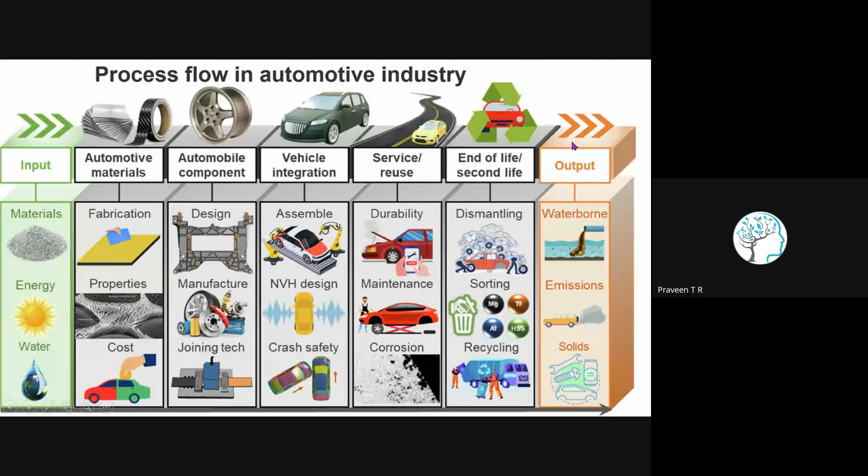So this is what generally happens, but in this manufacturing industry, I'll concentrate in the present session on energy. Energy is my main focus because I'm going to talk about pollution and carbon capturing. So whatever manufacturing industry we plan, we need energy - that is what we are going to talk about right now.

Another example is in the construction industry. In construction industry, we need aggregates, we need red bricks, we need sand, we need cement. Wherever you consider here, these raw materials are prepared by using energy, right?

Aggregate - right now we are using modern machineries which run by electricity or fossil fuels. We have to crush the stone to get the aggregates. So again here we are using energy in terms of mechanical energy from electricity or fossil fuels.

For sand, again we need to transport this sand from one place to another place, so we need energy here. Cement is one of the biggest energy consumption sectors. This is one of the cement processing plants, how it runs - I'm showing this because it's one of the biggest energy consumption sectors.

Again, if I want to manufacture bricks, I need to bring a lot of raw materials, then I have to cook it - cook the bricks to make them stronger. Or in engineering terms, we have to do autoclaving. This is what the civil industry requires, normal civil industry.

So when it comes to the preparation of cement, we need raw material coming from the truck. We are going to process it through crusher, secondary crusher, then we are going to proportion it - add the different parts. Grinding and milling, we are going to reduce the size of this, then put it in the hopper, preheater, kiln, and autoclave again. Lot of process in civil industry.

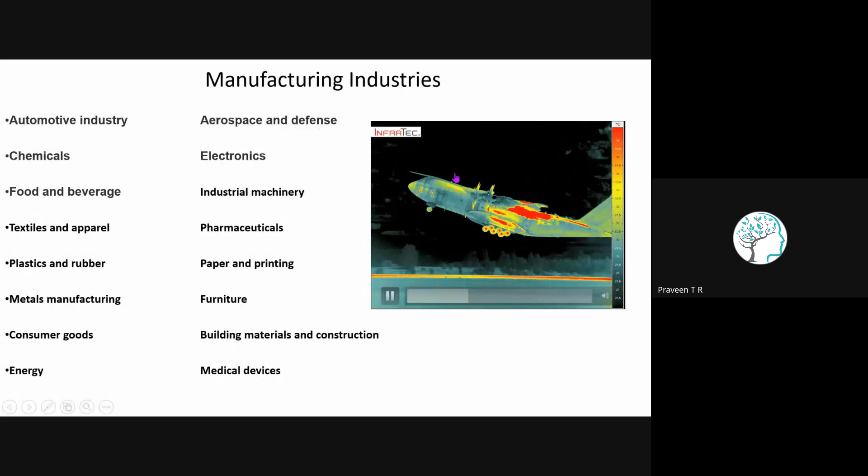Every industry needs some sort of energy. So where are we getting this energy from? That is very important in our discussions.

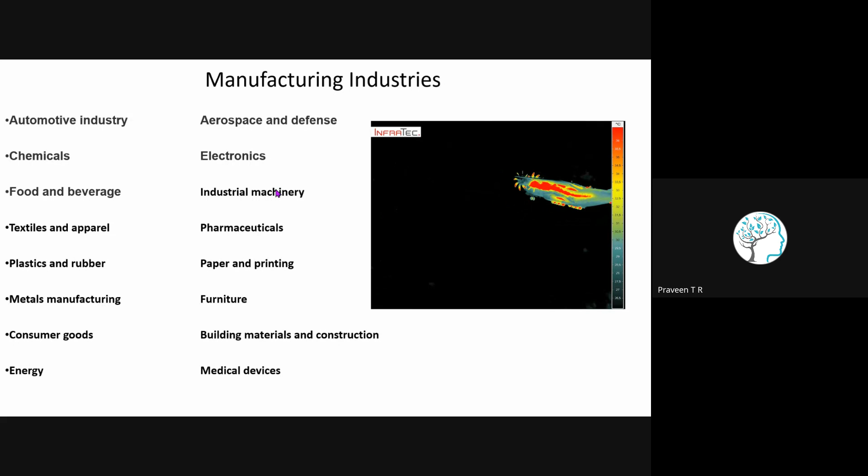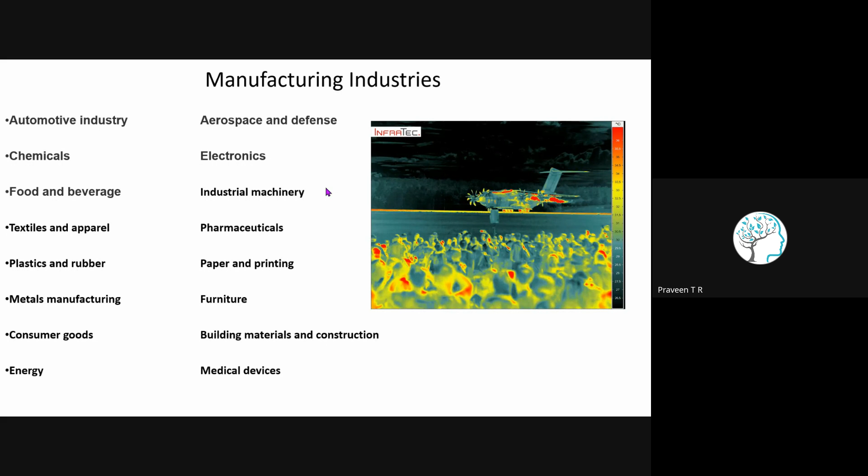So in the previous slides, I tried to introduce the industries, manufacturing industries. In the next slide, we will take up a very important challenge for human life - industrial pollutions.

As I told, we need energy for manufacturing or processing. Where are we going to get the energy? Energy is obtained from a lot of sources, which I'm going to discuss in the upcoming slides.

So what are the different pollutions? Right now we are concentrating on air pollution, which is very critical. You can see a lot of people suffering from respiration problems. If you go to North India, because the temperature is dropping, the pollution will increase.

At the same time, people will try to fire their agricultural land, which will emit a lot of smog. This will increase the particulate matter in the air, which creates a lot of difficulty with respiration problems. Lakhs of people will die because of this air pollution.

So the second one is thermal pollution. What happens if you go to a nuclear power plant or steam power plant? They will boil the water to produce steam, then feed it to the turbine to convert heat energy into mechanical energy.

Once that is done, they will take out the water. Some part of the heat from the exhaust water, they will reuse it. Some other part of the water, with its temperature, will go into the environment.

So what happens when you spread hot water into the environment? That is also very critical. Water pollution - we use a lot of water in industries, and the output of this used water will be thrown again to environmental sources.

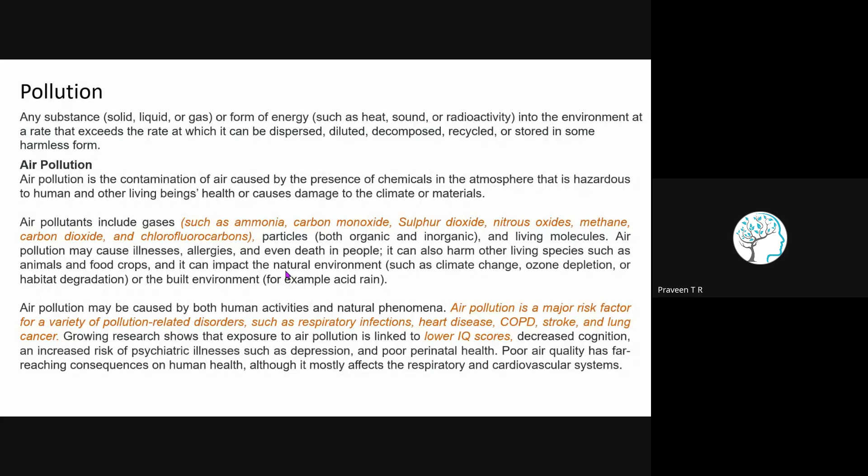Let's talk about some more interesting things regarding our environment, how we survive and how we think. This is how metabolism occurs. Whatever we eat gets converted - food is digested in our stomach, and once digested, it passes to the intestines, which extract the nutrients, and then it gets pumped to the remaining parts of the body.

The basic criteria of food is that it has to generate heat, to keep our body warm. Once the body is warm, the other parts of the body will start working properly and more comfortably. So once it's more comfortable, everything will work properly. Our brain is very important for everything - it controls everything. That's the basic control system.

This is how our industry also evolved - based on the brain's working methodology, we work with automation, AI technology, neural networks. We're simulating everything from nature basically. So what happens is the brain sends proper signals to the heart, to the lungs, to the stomach, to every part of the body. So how exactly does the brain work?

The brain gets supplied with oxygen - you breathe oxygen here, and when you breathe good oxygen, you'll have very good oxygen-rich blood. This is the pump - this blood comes from the heart to the lungs, and from the lungs it goes to the brain again. When you have very good oxygen, you'll have better thinking patterns. That's the reason.

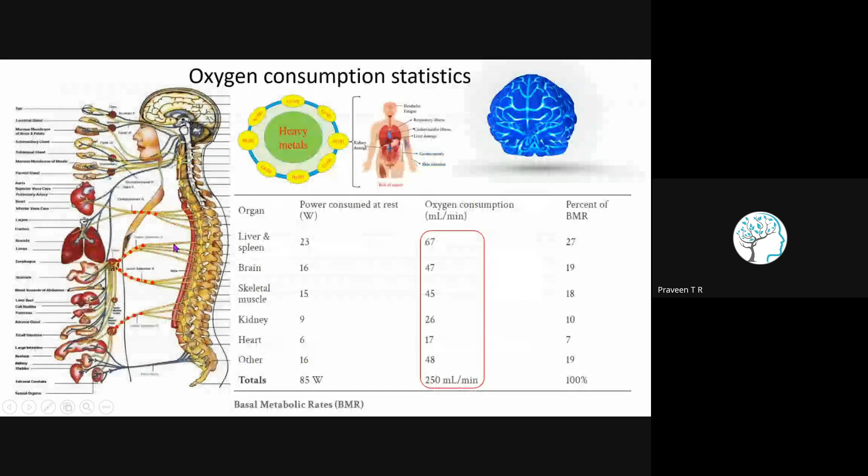Then your basic function of organs will get affected. If you eat something bad, your stomach gets upset. You may get a headache, or if you eat something with more cholesterol, you will get blockages. Lot of things. Basically whatever we eat is reflected in our health system. So this is what happens, hence proper food and proper oxygen are very, very important in our life.

So this is basically what I discussed till now, how we are going to survive in the present scenario with our human environment. How is our human environment created? The next question is how our human environment is created and how it is maintained.

So basically this is our solar system, this is our sun, our earth and moon. It will be rotating in an inclined position, rotating at an inclined rotation and spinning on its own axis. So there are two angular movements.

So as it is spinning, the area exposed to the sun keeps on changing with the spinning axis. That is what gives us daylight and night. When it is exposed to the sun we have daytime, when it is facing away from the sun, it will be having a night mode.

So what happens when it is exposed to the sun? 43% of the total radiant energy emitted from the sun is in the visible part. For example, out of 100% of the solar energy from the sun, we receive some energy in terms of electromagnetic radiation. This is the wave we receive in the form of energy. We receive X-rays, UV rays, visible rays, infrared rays, microwaves, radio waves, and some other profiles of wave nature. So this is what we receive from the sun.

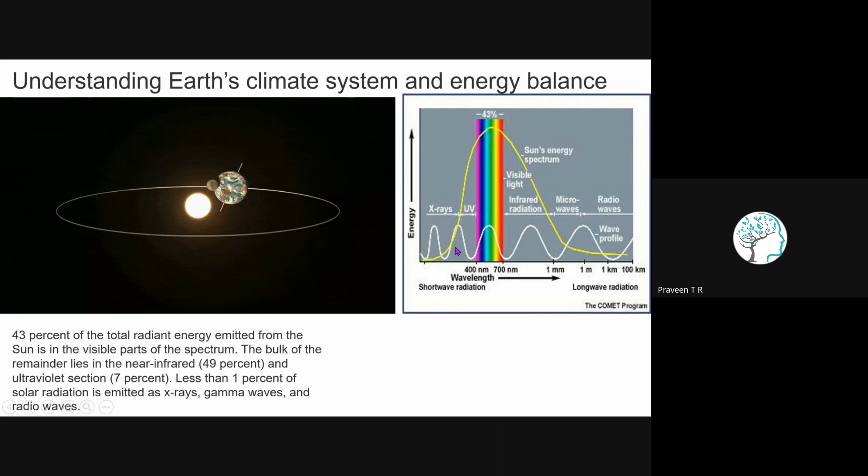So basically what we have understood is the major source of energy from the sun is in terms of visible light and heat energy. This is what we are able to get from the sun.

So, energy budget. Earth's energy budget. For example, imagine you have a bowl in your home, and you are putting in every day 1 liter of milk, and you are taking out every day 1 liter of milk. So your balance of milk each day will be zero. If you buy 2 liters of milk but consume only 1 liter, the other liter will get wasted, right? It is not balanced, so you will accumulate a lot of waste.

So similarly, what happens with our environment? Earth's balance means, for example, incoming solar energy. If you consider 100% of solar energy that we are receiving, out of that, 51% will be received by land and oceans. Whatever land and ocean, the Earth's surface will receive, 51% will be absorbed. This creates a lot of biologically active systems and makes the Earth's surface warmer. That's the way we are able to live on the Earth's surface. So this 51% is very, very crucial and important.

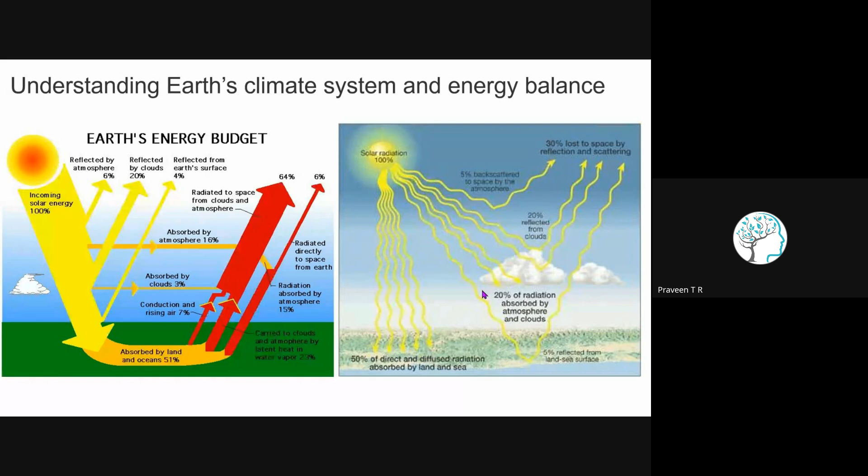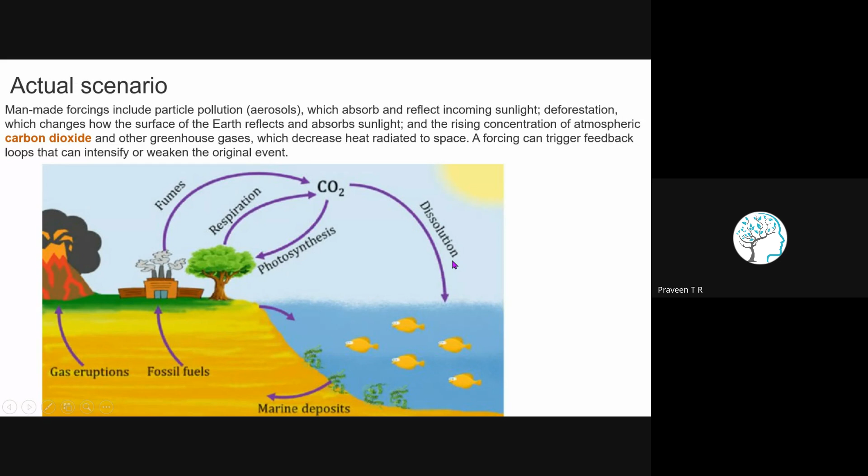Similarly, in the seabed also, for example marine life like fish and other water animals will be emitting carbon dioxide, and this will be consumed by the marine plantations. So this is how the actual photosynthesis works. Basically, we will be emitting more CO2 because of our human activities.

So what exactly happens in combustion? In the combustion reaction, we need hydrocarbons, like sugar, fat, something like that. This hydrocarbon always requires oxygen to get our required heat, so oxygen is a must. When you use oxygen with hydrocarbons, the byproduct you always get is carbon dioxide and water. So however much energy you want, in that same way, carbon dioxide will increase - more energy, more carbon dioxide.

Less energy, less carbon dioxide—it's directly proportional, basically. So in this picture, I'm trying to show fossil fuel consumption in 2023. There are different fossil fuels like coal, natural gas, and oil. We can see how much China is consuming.

So why are these countries important? If you see China, the population is more, the manufacturing industries are more, hence the consumption is more. If you come to the US also, they have a lot of manufacturing industry—even though the population is less, consumption is more.

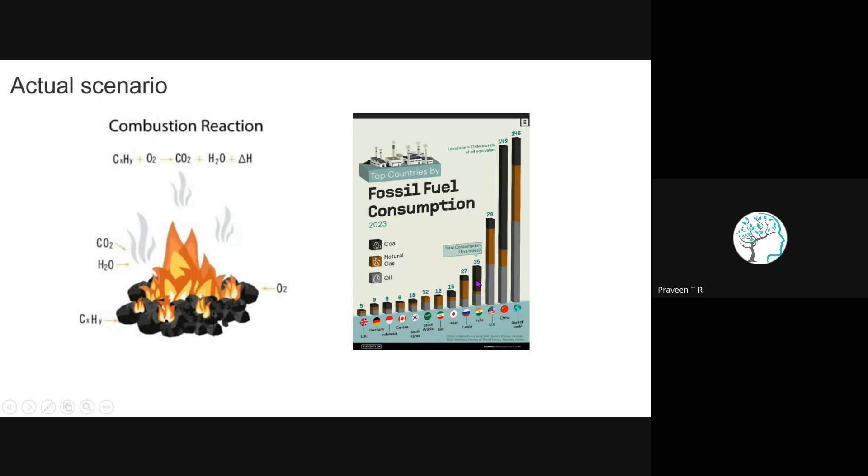Just think how much fuel you consume—such a quantity of oxygen is also required for your energy generation, and so much carbon dioxide is emitted. Hence energy production is completely directly proportional to carbon dioxide emissions.

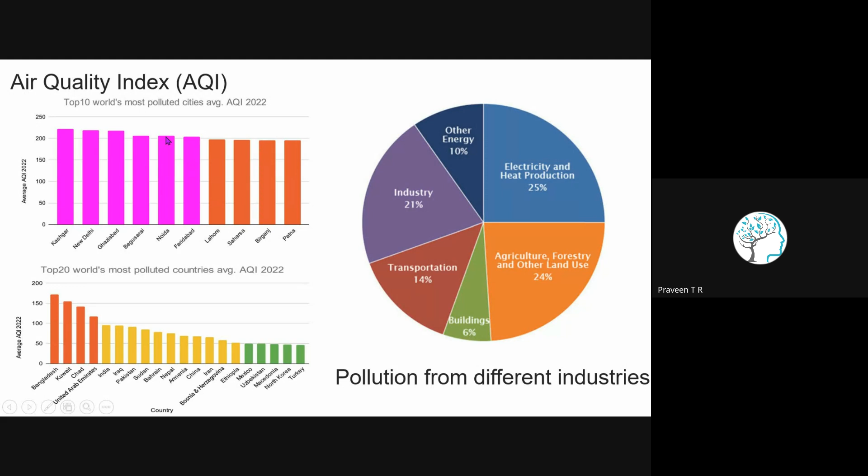Red is unhealthy. Some members of the general public may experience health effects, and sensitive groups may experience more serious health effects. So if you look here, Delhi is classed at 200, Ghaziabad is classed at 200, Noida is classed at 200, Patna is near this one, Faridabad is classed at 200. That means they are all in this red, already unhealthy conditions. That's the reason people are more repeatedly going to the hospital for respiratory issues.

Purple is very unhealthy, more than 201 to 300. Health alert: the risk of health effects is increased for everyone, even healthy people and younger age groups will get affected. Maroon, there's not much to talk about this one - it's hazardous. We cannot take in any air, or we cannot breathe at all in these conditions.

So air quality is very important. This shows air quality directly shows life quality. We can convert it in these terms - air quality basically translates into life quality. So think about that, that's the reason at least go to some places where you will have good air quality index, breathe for some time, get release of your stress and all, come back and work. So this is how lifestyle is required right now.

Main air pollution sources, as I discussed in the previous slide, similar to that: waste treatment - when you do waste treatment, a lot of chemicals will be released like methane and other gases into the environment. Farming - when you burn farming waste, a lot of smoke gets released. Transport, again it's a combustion process, you get a lot of emissions. Works and mining - basically if you want to get something, you need to burn energy, and when you're burning energy, you get emissions. Livestock - when we breathe, we receive oxygen and emit carbon dioxide, similarly with livestock.

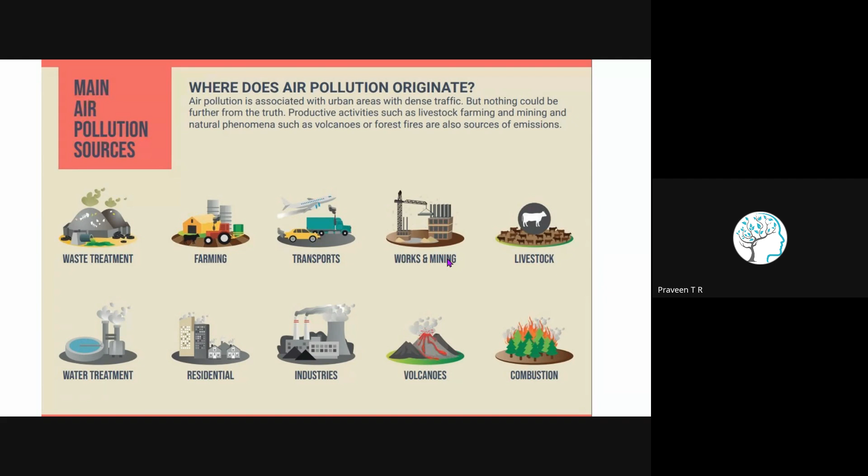So water treatment, residential, industrial, volcanoes, combustion - everything is very similar. As mentioned earlier, every process, natural or man-made, produces air pollution. But natural processes are not so easy to control, while man-made processes we can at least try to control. That is the main intention.

So, types of industrial emissions. Industrial emissions come from different sources and have important consequences for health and environment, which underlines the importance of controlling and reducing industrial emissions.

The main industrial emission is carbon dioxide, the main greenhouse gas emitted from fossil fuel combustion. How much energy is required determines how much carbon dioxide will be emitted to the surroundings, in power plants and manufacturing, contributing to global warming and climate change. Global warming means the temperature of the globe is increasing.

It's alarming already. Methane gas is emitted during the production and transport of coal, oil, and natural gas, as well as by certain industrial processes, and is more potent than CO2 in terms of impact on global warming. I will explain why CO2 and CH4 are more potent in the upcoming slide.

Nitrogen oxides are gases resulting from high temperature reactions in industrial processes and vehicle combustion. They can cause respiratory problems and contribute to the formation of smog and acid rain. Since air is a combination of nitrogen and oxygen, when you supply air for combustion, you're also supplying nitrogen. When nitrogen is exposed to high temperature with oxygen, there will be production of nitrogen oxides, causing smog and acid rain.

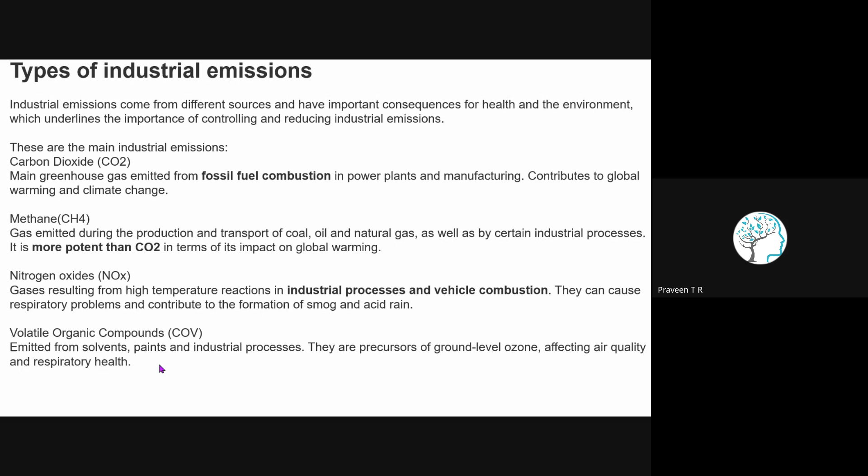Some other emissions are particulate matters, meaning small particles from combustion on stationary and mobile sources. They can penetrate deep into the lungs and cause cardiovascular and respiratory problems. So we have to reduce emissions as much as possible.

Hydrogen sulfide is a rotten egg odor gas released by industrial processes such as oil refining. At high concentration, it can be toxic and affect human health. One of the basic characteristics of hydrogen sulfide is its very bad smell, like a rotten egg odor.

When people have gastritis, they will start to have that smell when they fart. It's practical science - when they fart, they will have a very bad smell, which is the smell of hydrogen sulfide. That indicates the sulfide content is more in the body and your digestion system will be having a problem.

Asbestos is mineral fibers used in construction and manufacturing. Inhalation of asbestos fibers can cause serious lung diseases, including cancer. So in this category, it's very important.

Recently, I came across one of the cases locally - people working in the fiber industry, some small fibers went inside their lungs. In the beginning, it doesn't create any problem, but after a long time, after long years, the patient is getting cancer symptoms. He's undergoing cancer treatment right now. That is basically the mineral fiber which went inside the lung.

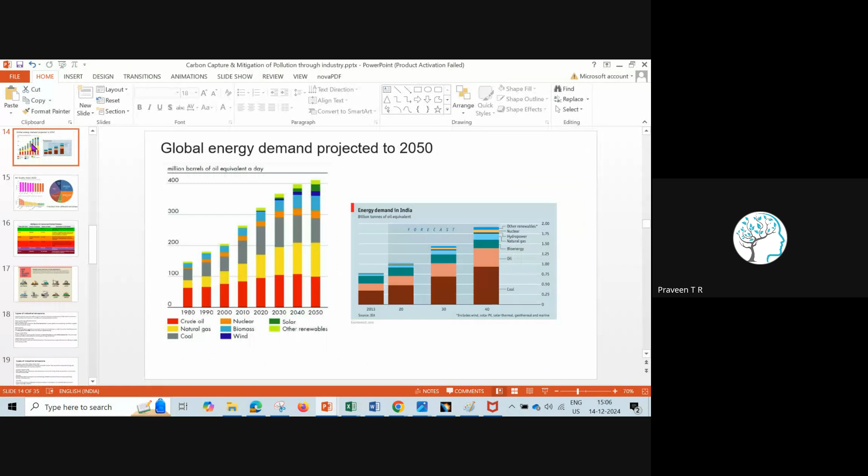This indicates that however much fossil fuel we burn, that much quantity of emissions we are going to get.

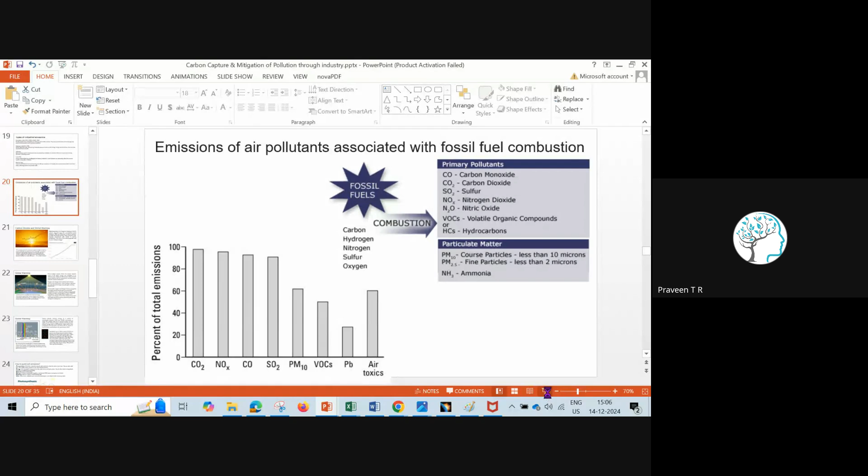So now onwards I will concentrate only on CO2, because CO2 is one of the major contributors to global warming. We have to look at this because the temperature of the earth is increasing. Let's try to understand what exactly carbon dioxide and global warming are doing.

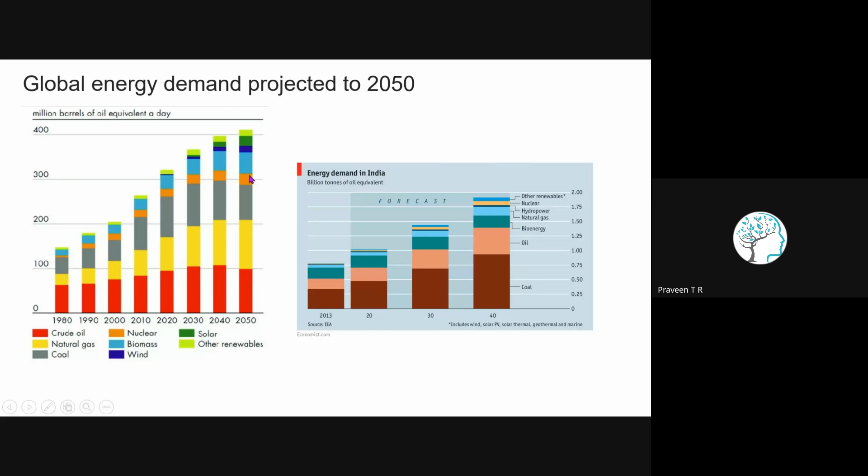In 2024, for example, you can take it here - we are burning this much of millions of barrels of oil, this much of billions of tonnes of oil equivalent. So that's the reason we are getting 420 ppm. But as projected for 2050, the energy sector will be increasing - we are going to combust more and more, meaning obviously the carbon emissions will rise. But as per the evidence, we have to come back to 350 parts per million.

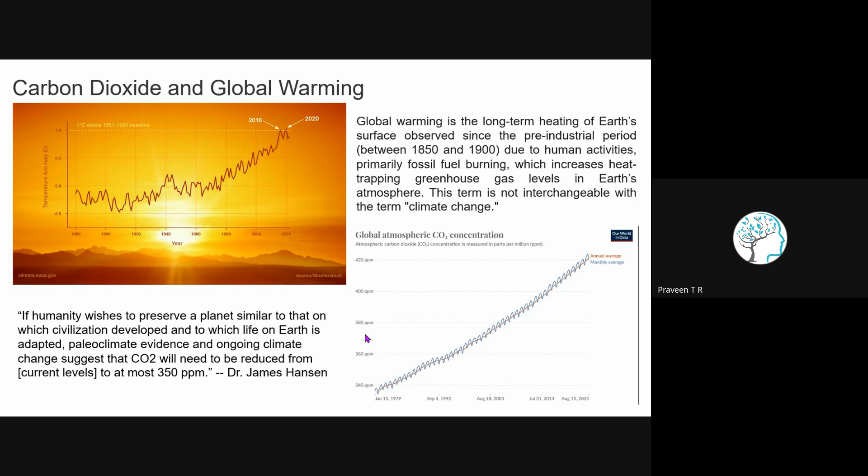Why do we have to decrease carbon dioxide? Why not other gases? We are going to address that in the upcoming slides.

Global warming - we will try to understand what exactly global warming is. When sunlight reaches Earth, the Earth's surface absorbs some of the light energy and radiates it as infrared waves, which we feel as heat. These infrared waves travel up into the atmosphere and will escape back into space if unimpeded.

So what happens is the energy from the source comes to the Earth's surface, whether in terms of light or heat. Even if in terms of heat, it will get converted into infrared waves on the surface, and the heat waves will go back to space if no disturbance exists. So what happens if disturbances exist?

What are the particles in the atmospheric air? We have oxygen, nitrogen, and right now we have emission gases also like carbon dioxide, carbon monoxide, nitrous oxides. So different emission sources we have, along with oxygen and nitrogen, in the atmospheric air. Oxygen and nitrogen don't interfere with infrared waves in the atmosphere because molecules are picky about the range of wavelengths that they interact with.

See, carefully understand here - in this atmosphere we will be having water molecules in terms of vapor, carbon dioxide, methane gas, oxygen molecules, and nitrogen molecules. So in this atmosphere, nitrogen and oxygen molecules do not affect the heat going back to space. The nitrogen and oxygen does not affect what is going back to the space.

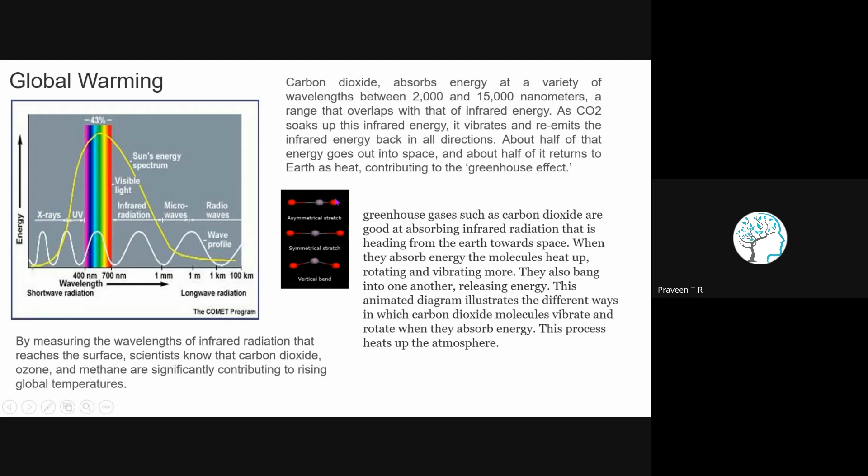Once it is absorbed, it will vibrate. There are different types of vibration modes: asymmetrical stretch, symmetrical stretch, and bending mode. Whenever it vibrates, it emits the energy again in all directions. Some part of the energy goes back to space, and some part reflects back to the earth.

So this is what CO2, H2O, and methane do. Oxygen, O2, has a smaller molecule size, so it can easily allow this infrared wave to escape. Nitrogen is also smaller, so it escapes too. But carbon dioxide is longer, H2O or moisture is longer, and methane is a compound - these molecules will not allow the infrared rays to directly go to space. These molecules absorb the infrared waves and vibrate, with some part reflected back to space and some part reflected back to earth.

So this is the reason for the earth's atmosphere getting warmer. This is a very important logic. Any doubts? If you want to ask any questions from these slides, it's most welcome.

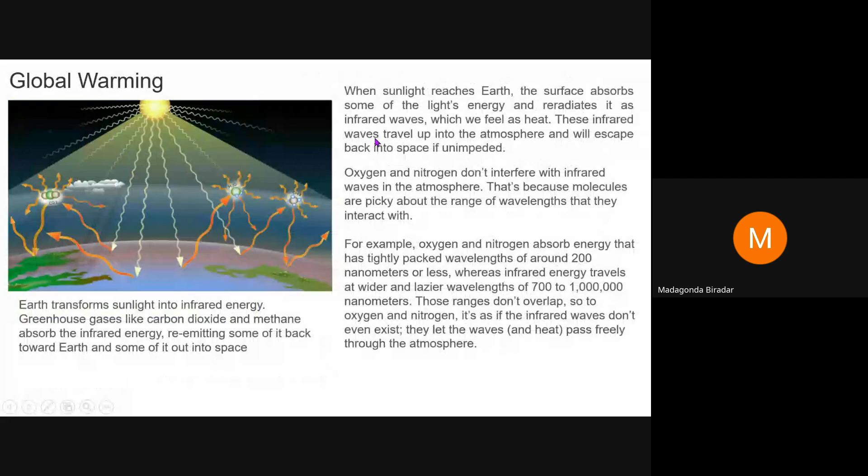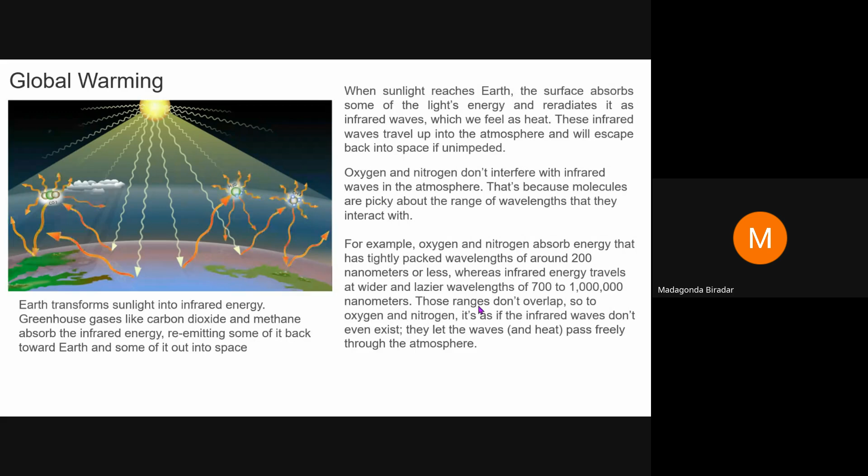So this is what Dr. Praveen, yes. Just sorry for the disturbance in between. We have time up to 3:30, sir, so you are really going in deep, sir. Okay, time, okay. With another, okay, I will try to. Okay, fine, thank you.

So this I covered. Now, how to avoid the CO2 emissions?

Transport - if you decrease transportation, decrease energy use for food, business, shopping - if you consume less energy, there is a probability of using less fossil fuels and a possibility of less CO2 emission. But we are not willing to do that because we want a more comfortable life, so we will burn more energy. That is our nature.

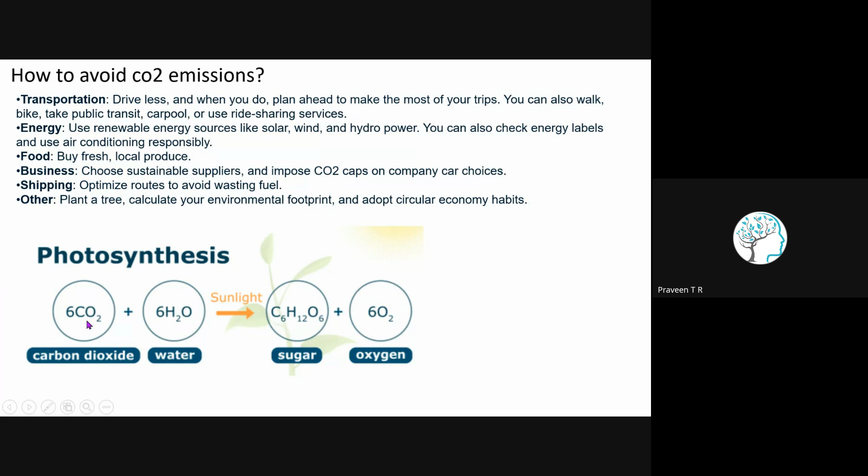Second thing is photosynthesis. As we know, photosynthesis requires carbon dioxide and H2O. When this reacts with sunlight, we get sugar, which is a carbohydrate, and oxygen again. But we are also working against this through deforestation, so the quantity of photosynthesis decreases. That is the reason CO2 is more and more in the environment.

So what is the other thing we can see? Carbon capture and storage. As we know, industries burn more and more fuel, and this is the source of getting carbon dioxide. As we know from human activities, why can't we capture the carbon dioxide at the origin itself and try to use it or store it in some other way? That is what carbon capture and storage will try to help us with - you can store it or you can use it also.

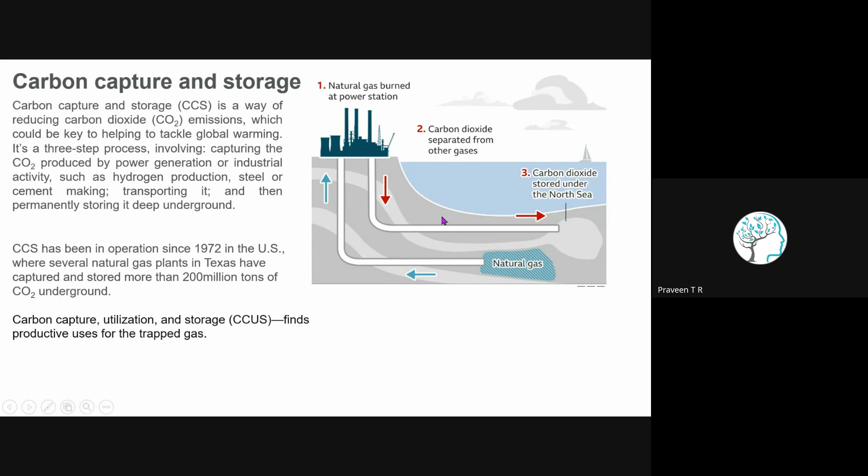Okay, so that is the two options we have. Carbon capture methods usually include absorption method, cryogenic method, membrane separation method, adsorption method, and chemical looping method. Maybe I will take absorption method and membrane separation method, so I will try to not spend much time on the remaining part.

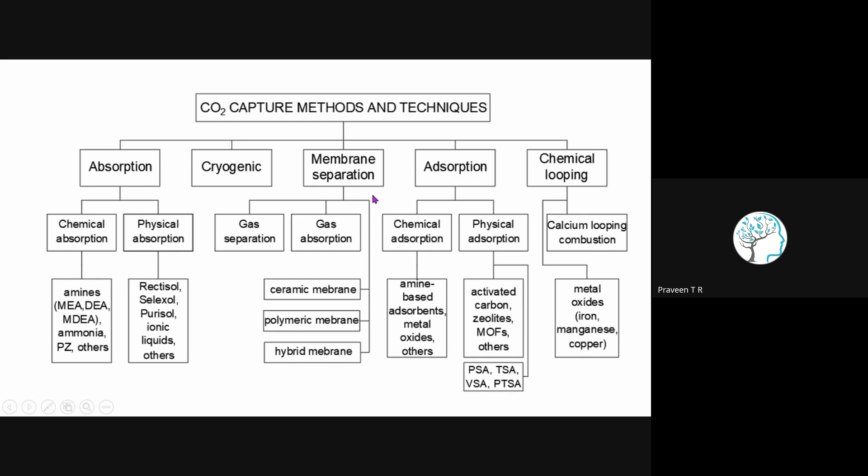Okay, pre-combustion method. As we know, combustion is required for energy sources. What are the combustion requirements? We need hydrocarbons and oxygen. So what happens here? We will be supplying fuel like coal, gas, and biomass, along with oxygen and water. Gasification happens here, and we supply the temperature. From the gasification, we'll be getting carbon monoxide and hydrogen.

When we pump this gasification product into the water gas shift (WGS), what happens? We will be pumping H2O and converting CO into CO2, while keeping H2 as it is. So carbon monoxide is converted to CO2, and we have hydrogen. CO2 and H2 separation will occur. We take the CO2 somewhere else, and H2 is pumped into the combustion chamber. We supply air and get pure combustion in terms of heat and electricity, with water as the byproduct.

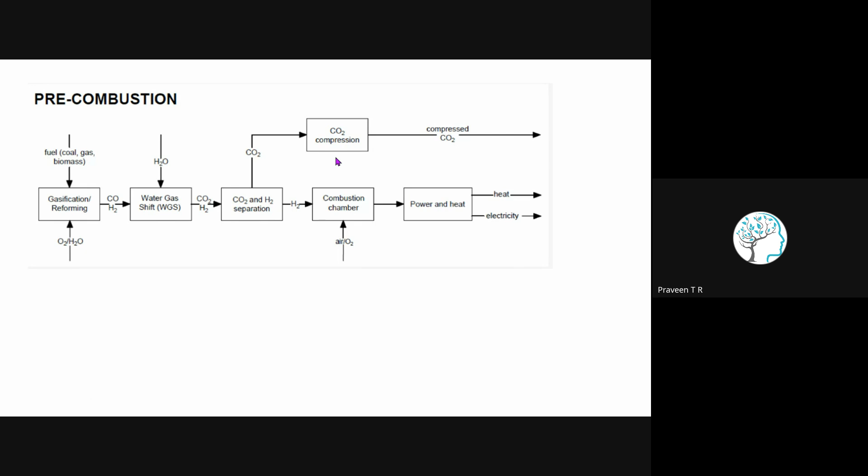So CO2 will be separated and compressed. When you compress it, what happens? It changes phase from vapor to liquid. When compressed, it is stored in some places. So this is the pre-combustion technique.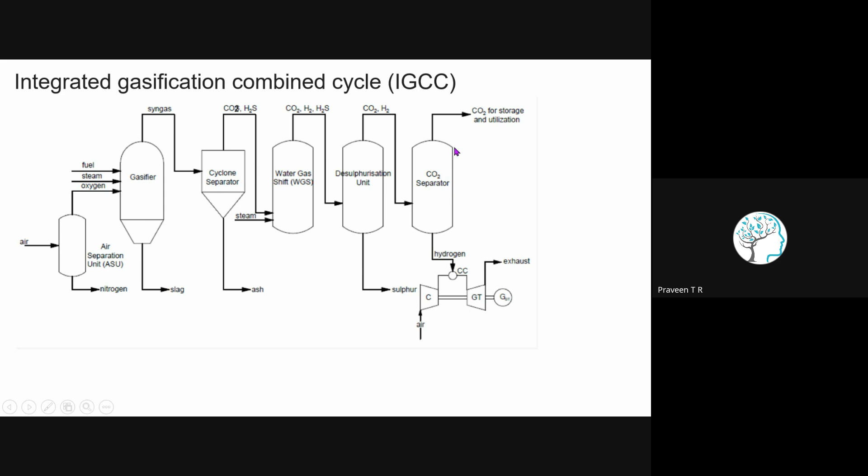We supply high temperature steam here, and again the water gas shift takes place. We get CO2, H2, and H2S gas. The desulfurization unit separates the sulfur parts. Again, CO2 and H2 come out after the sulfur separation and go to the CO2 separator. Hydrogen is supplied to the combustion chamber, and CO2 is again compressed and stored or utilized.

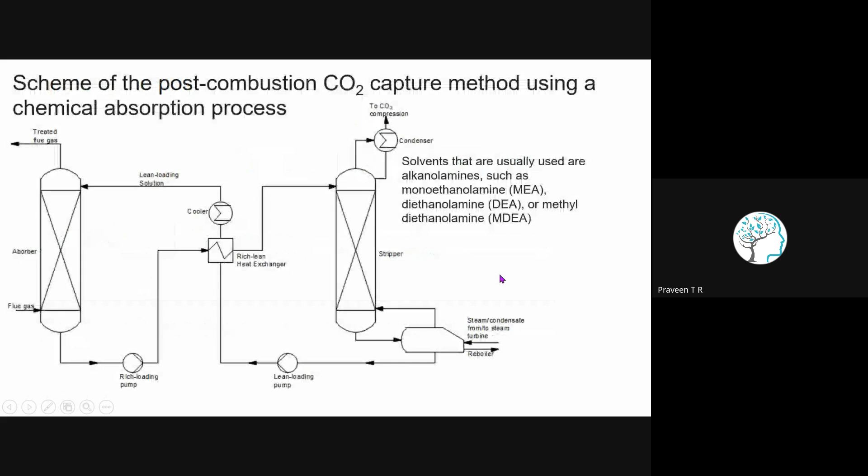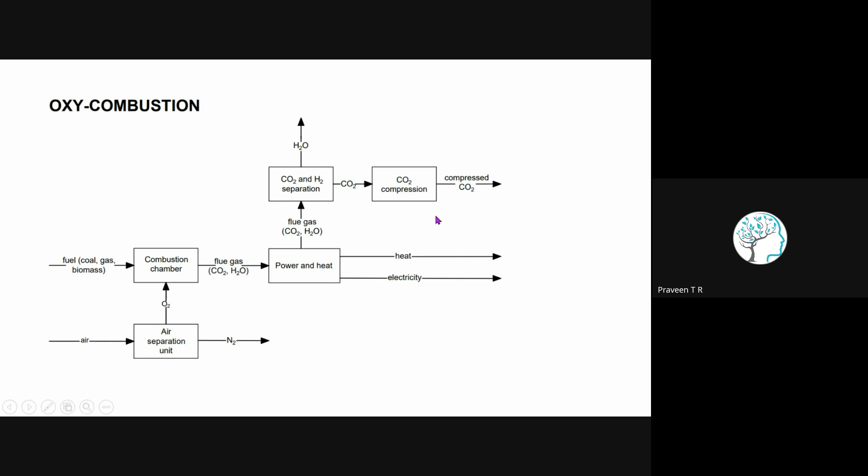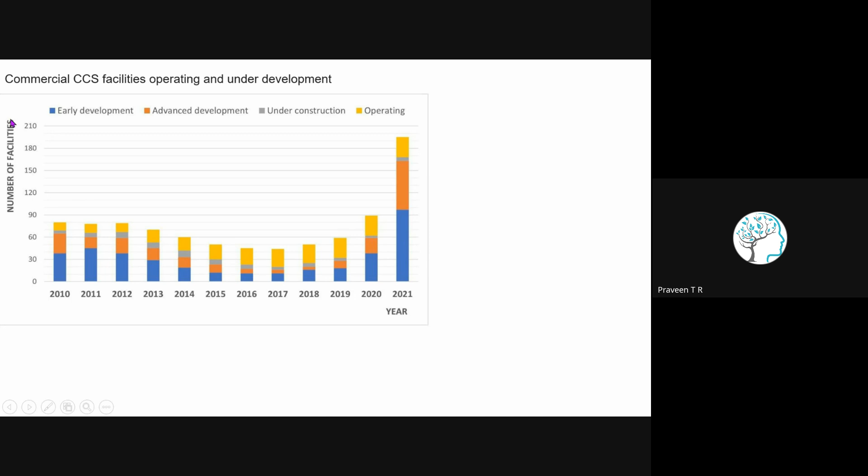Okay, so how many people are looking for CCS facilities? You can see the numbers increase. From 2020 to 2021, there is a very big increase in the number of facilities. But even though it's doubled, the quantity will still be very small compared to this one. Right now we are very famous in the US basically.

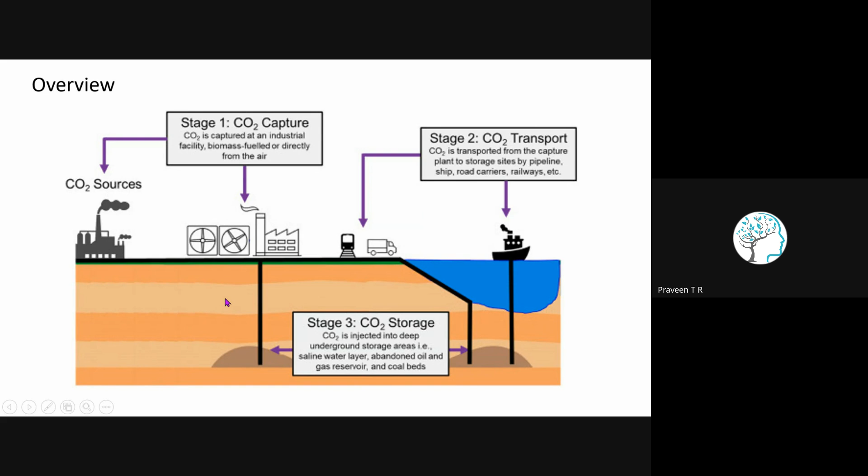So what are the drawbacks? Basically we have to spend a lot of money for the capturing. You need additional support, additional system, additional energy. These are the things you have to penalize to society to make it work. The second thing, whatever we capture and store, we have to make sure there will never be any vent holes or other damage, or it may create some problem with the earth's plates also. So this may be another issue with respect to the CCS technique.

So this is what I just want to convey. Any questions?

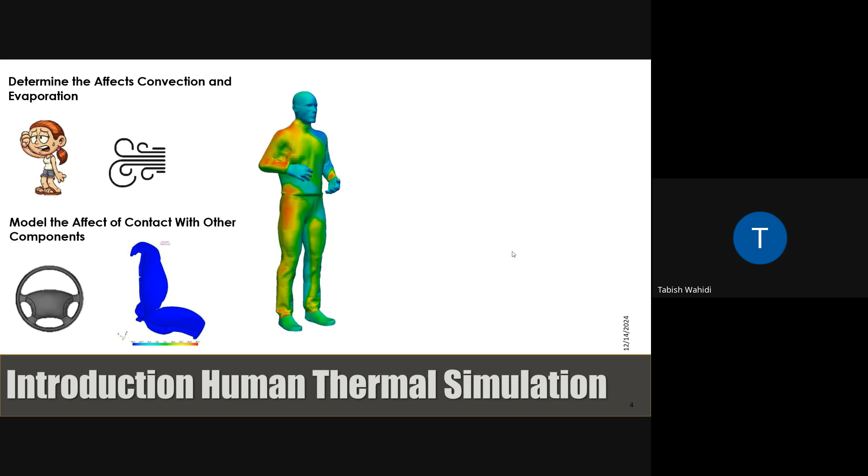Apart from that, it also matters what the environment condition is outside, whether it's a very cold place, a very hot place, or a normal environmental situation where the human is standing or performing some activities.

Based on this, we try to understand the human's local comfort, local sensation, local body temperature, and overall body temperature. All these factors will decide human comfort and sensation.

Apart from this, we have to consider a lot of things, like your body mass, your size, whether you are male or female, your body mass index, how fat you are, how tall you are, what type of clothing you are wearing, what type of body activities you are performing, how long you are doing some activity, whether sleeping, driving a car, or going to the gym, how rigorously you are doing gym, and for how long.

So every aspect comes into picture when trying to simulate the human and understand human behavior in terms of thermal simulation - whether the human is comfortable, feeling sensation, sweating, shivering, what is the blood flow rate, what is the overall body temperature, hypothalamus temperature. All this depends on these activities, on body size, and on activities.

Now let's take some situations. Consider a man sitting in a car, where there is solar loading coming onto the dashboard, heat getting radiated from these positions, and if your seat is not comfortable, it's also radiating heat to you.

Or you may consider a situation where an airplane is flying at very high altitude, at very high velocity - your thermal conditions are different, the weather condition keeps changing. You need to regulate all these things, and what is very important is your environmental situation.

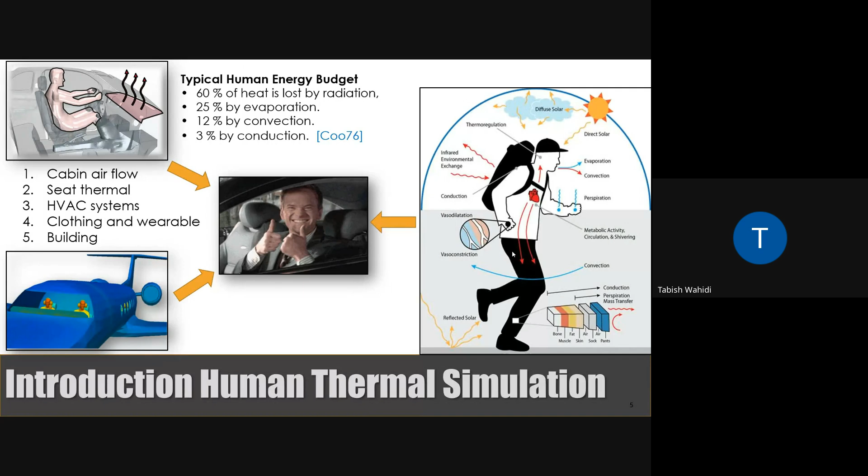So if you talk about human thermal simulation, we need to consider two major things. One is your short wave - this is the situation when radiation strikes the human skin. There are two types of wavelengths that mainly come into consideration when you try to calculate human thermal: one is short wavelength, second is long wavelength.

In short wavelength, generally what happens is that a large portion of the radiation gets reflected - almost more than 70% is getting reflected from the surface. Only the rest gets penetrated into the skin.

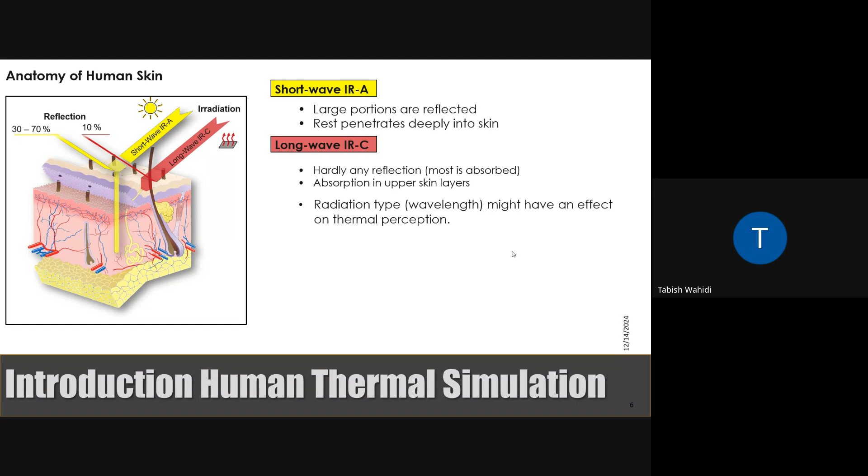We also have to define which skin layer is involved, whether it's going deeper or only getting absorbed by the upper skin layer. For long wave, generally only a few are reflected, hardly maximum are getting absorbed by the upper skin layers. Considering all this, every wavelength has a different impact and feeling, which makes human thermal simulation very sensitive, and it will help you decide whether a human is in a comfortable position or not.

So define what exactly comfort is as per the ASHRAE standard. ASHRAE says thermal comfort is a condition of mind that expresses satisfaction with the environment. Suppose a guy from Russia got habituated to standing long in very cold weather. If he comes to North India where the temperature is around 7 or 8, he'll feel very comfortable, while for other guys, we are shivering - for them it's not a comfortable position. So it's all about the expression of your mind's satisfaction. Although the environmental condition is the same for both humans, the satisfaction level is different. Based on that, your comfort level is decided.

Now we'll try to understand the flow pattern, how a thermal simulation can be done. To do this, you must have a situation where you need to consider thermal conduction, convection, radiation, and environmental loading. Environmental loading comes with weather conditions. So weather condition means, suppose a man is in Siachen, and we try to calculate his thermal comfort on 15th of December, where the weather is very adverse, wind speed is different, wind direction is different, and solar loading condition is different. That we need to consider when trying to understand human thermal simulation.

Then there must be a human model. These go hand in hand - it's like a coupling. Apart from conduction, convection, radiation, and environmental condition, a human model has to be there, associated with some equations that come into picture. If you do coupling with these two things, then you need to calculate the equivalent temperature, what is the mean radiant temperature, what is the percentage of dissatisfaction. Based on that, it will help you decide which environmental condition you are taking - are you considering only the environmental model, or also the physiological model. Based on calculating all these, you can decide whether a human is in a comfortable position, what is the sensitivity - all this is called human thermal simulation. So it's like a flow.

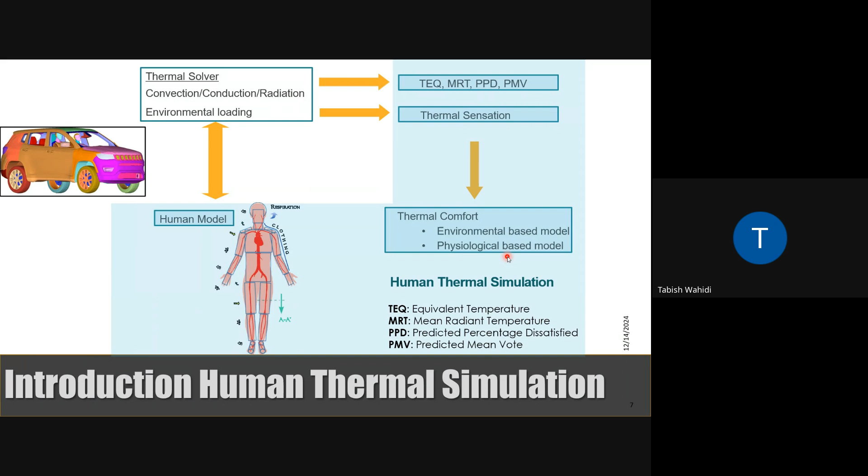If we talk about the environmental and physiological approach, that is very important when trying to understand the deeper aspect of why these two things are important when doing a thermal simulation for a human. So in this condition, we'll try to understand the environmental approach.

Environmental approach is a situation where you only consider the environment. Like a situation where you kept your car outside and you're trying to understand the solar loading on it - what is the surrounding temperature, what is the air temperature, what is the air velocity, what type of thermal resistance is there, what is the humidity. You're trying to understand every aspect of environment, except that the human is sitting inside - considering that if the environment is comfortable, a human would also be comfortable. So it's a backward understanding - if a human is outside and the weather is comfortable, he will feel comfortable. This is also an approach.

We call this an environmental approach, but we also call it a black box approach. Why is it a black box approach? Because for one man, the weather outside may be very cold, but for other guys, it may be comfortable. So we need to consider the human aspect - that is called the physiological approach. In the environmental approach, we only consider the environmental condition.

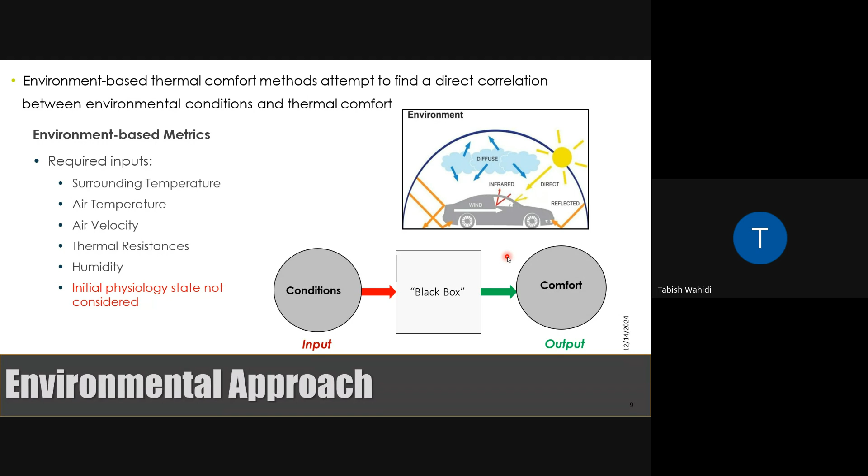Based on that, we also have a method to calculate whether a human is comfortable or not. This is generally predicted by two methods - one is called the PMV method, one is called the PPD method. Based on these methods, they decided a 7-point standard regulation.

Suppose this 7-point scale from +3 to -3. If somebody is situated at 80% PPD, that means human is at -2, so he may start feeling very cold. If we come closer to 0, around 5% or 7% PPD, he will feel neutral conditions, not very comfortable, warm, or slightly warm. Based on these 7 points, we can indirectly calculate that the human will be in a comfortable position. This is the method of calculating with PMV and PPD.

Apart from PMV and PPD, they also have an approach called the equivalent temperature approach. Here we need to balance what the balance actually means: the outside temperature and the human body temperature are both getting matched. Essentially, we are creating a homogeneous situation outside. If this situation is getting matched, if things are already balanced, then we can say this human will also be in a comfortable position.

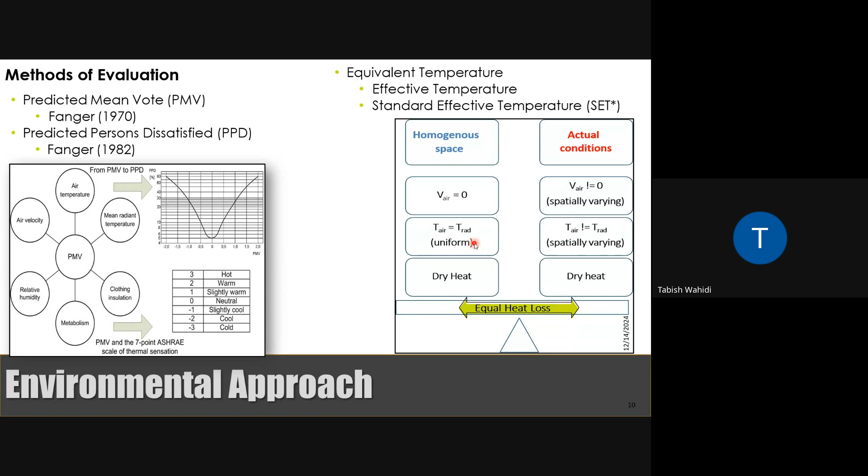So all these are ways of calculating and understanding human thermal simulation or comfort level based only on the environmental approach. But we do have an option to do the calculation based on the human, keeping the human in that environment. That is called a physiological approach. In this condition, apart from the basic environmental thing, we keep the human inside and try to calculate human comfort based on this environment. So it is like environment plus human, which is why I call it a physiological approach.

So it is not a black box approach. Here we need to consider human physiology, his anthropometric information. We need to consider his skin temperature, core body temperature, evaporation rate, and explicitly we need to calculate some discomfort and sensation level. And these sensation and comfort levels are being calculated by very different models.

One is the ASHRAE two-node model, one is called the Pierce model, the Stolwijk model, and a very famous model we know as the Berkeley model. I'm going to deep dive into this Berkeley model - what exactly it is, why this model is well accepted around the world to do the calculation for a human. That will come up in a coming slide. I'm going to discuss this again.

So when you try to do the physiological approach, there is an equation working - this is called the bio-heat equation, where your conduction in tissue comes into picture, then advection in blood, your metabolic activity or metabolism comes into picture, heat transfer from environment, and energy storage. So apart from environmental conditions, all these come into picture when you try to do the thermal simulation with the physiological approach.

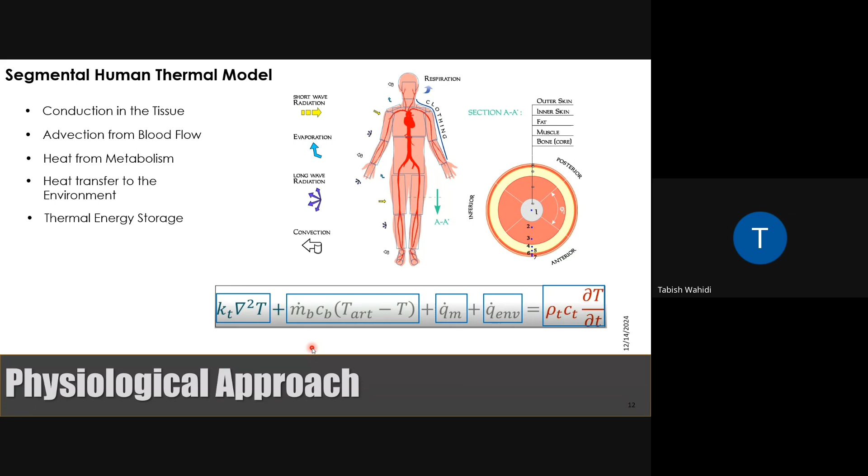So the physiological approach is a well-accepted model and widely used around the globe. People trust this approach more rather than the environmental one. But the environmental approach is quite simple, and we can indirectly understand that if the outside sensation is comfortable, the human will be comfortable. This may happen sometimes, so I can't say the environmental approach is wrong, but if we try to consider which is the better one, the physiological approach is better than the environmental condition.

And for this physiological approach, they have defined a scale which will define whether the human is in a comfortable position and how comfortable he is. Like for environmental calculation, ASHRAE defines 7 points; here in this approach, it is a 9-point scale. So in the 9-point scale, it varies from +4 to -4. Same goes with comfort also, and 0 they kept for the neutral condition. 1 is for slight warm.

So sensation and comfort are like a feeling - the condition looks like a human's. If your sensation is more, it doesn't mean your comfort will be less - it's not like that. They have a different approach also. Like a condition, suppose you are outside, all of a sudden you come to your home, or suppose outside is very hot and you put your head inside a bucket of cold water - you start feeling comfortable. Your sensation is high, but you start feeling comfortable. So we need to understand what exactly sensation is and what comfort is.

This 9-point scale is generally used to understand human physiological calculation, to understand human comfort and sensation. This model is adopted by Berkeley Comfort, which was developed at the University of California to calculate human comfort and sensation. Now coming to this Berkeley comfort and sensation model - what exactly it is, how it works, what is the basic physics, and how it calculates your sensation.

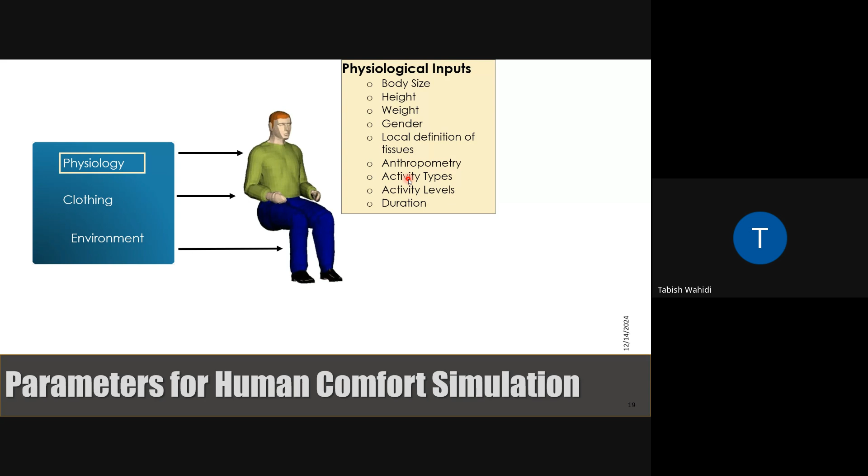Look at this - apart from your basic calculation, you must define the physiology of the human: what is the body size, height, weight, what gender, what anthropometric information, what type of activity they're doing, what is the activity level - whether they're driving a car and for how long, or going running - how fast, for how long, whether it's a male or female running, what body size they belong to. So your physiological aspects need to be considered when understanding human thermal simulation.

Next, a very important thing is your clothing - what type of clothing you are wearing, what is the GSM value of the clothing, what is the thermal resistance, what is the evaporative resistance, whether you're wearing cotton or woolen clothes, standing in a hot summer day or wearing cotton in a very cold environment. Also what type of clothing layer - single layer or multi-layered jacket, what material has been used, and what is the thickness of that material.

So we need to consider this situation when trying to calculate human physiology, human comfort and sensation, and body part temperature. Again, we can't neglect this situation. What is important is your environmental condition.

To consider the environment, we need to understand the radiation happening around. Are you sitting inside your home, or going outside? What is the wind speed, and at what height from sea level you are standing, whether close to sea level or at a hill station.

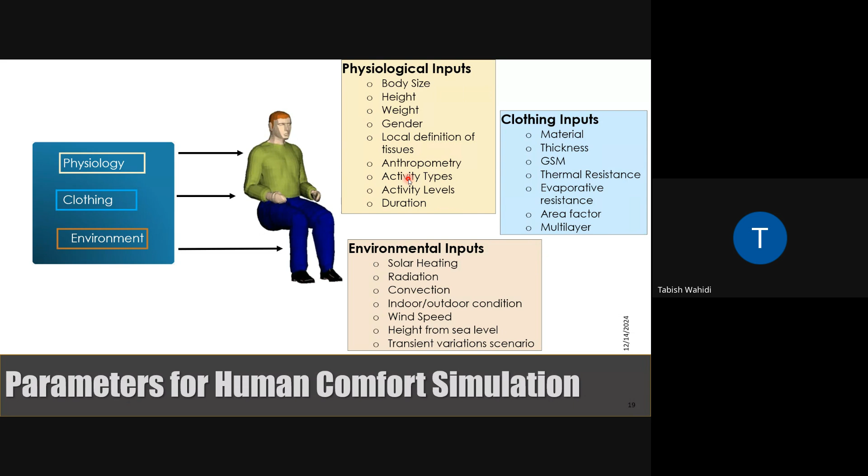Based on that, you can decide the human condition: what is body core temperature, what is hypothermic temperature, what is the blood flow condition, what is his convection rate, what is his evaporation rate, whether he's feeling sweating or shivering, what is his dilation condition, and what is his rectal blood flow temperature.

So after simulation, you come across all this information, and based on this temperature distribution that can be carried out, obviously you can't do a steady state analysis. You need to perform a transient analysis for a period of 5 hours or 10 hours.

Suppose a soldier is standing outside holding a gun at Siachen. After 5 hours of regular standing, his body temperature will be different, his shivering rate will be different. If he is wearing a comfortable clothing system, his body condition will be different.

So that is called a completely transient thermal simulation that we always keep in mind when doing this consideration. It will be a complete transient simulation.

In upcoming slides, I'll give you information about case studies or different conditions where we create a scenario, and do the simulation based on available information to understand if the human is sitting inside a car, standing outside, or doing some activity, whether it will be a comfortable position or not. Here are a few case studies.

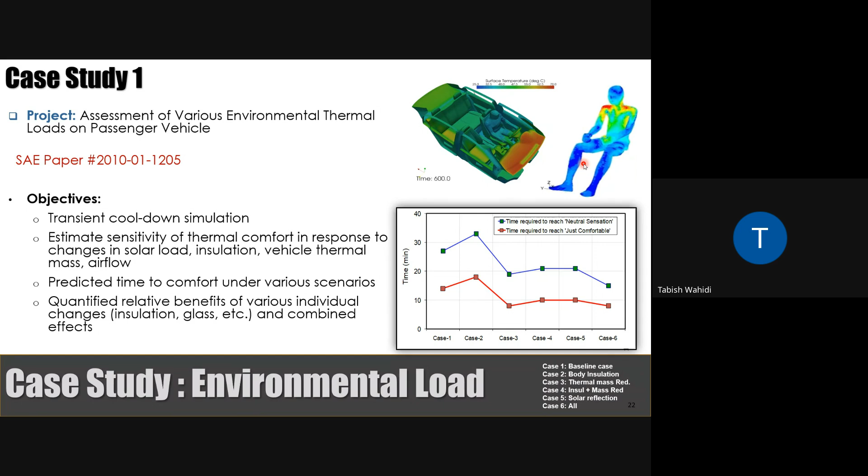We try to understand what will happen, and what each man of a different body size will feel - whether he will be in a comfortable position or not, and what is his comfort and sensation level.

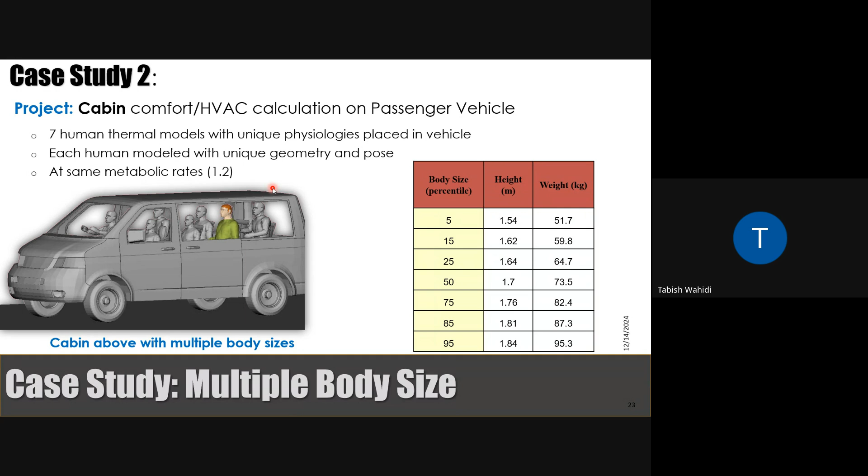So we created a scenario. In this scenario, we kept the vehicle outside in environment from 5 a.m. to 12 p.m. in a hot desert condition, with the vehicle empty. This is like a heat soak condition where your car keeps absorbing heat.

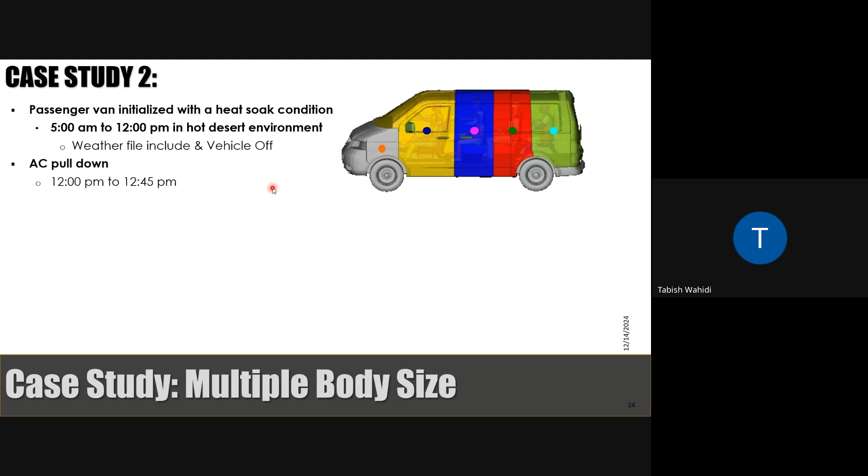Then we turn on the AC from 12 p.m. to 12:45 minutes, and based on that we incorporate the weather condition of that location. This was carried out for a Phoenix location, where the solar loading condition varies - you may find very high temperature around 12 o'clock at its peak.

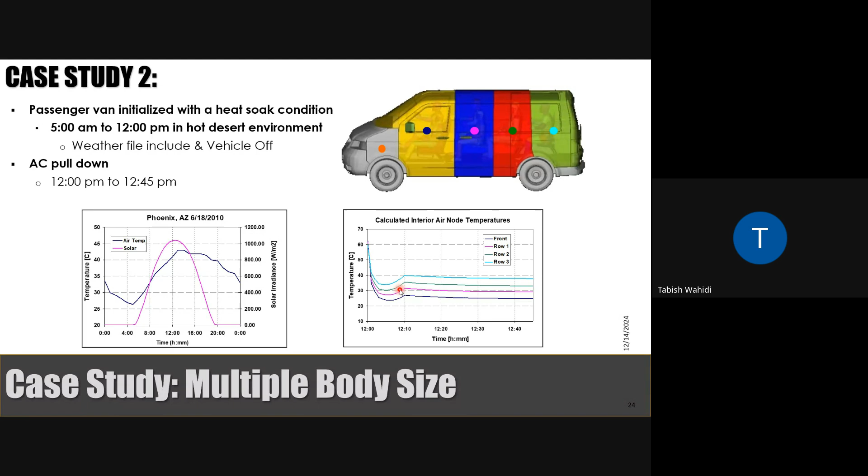That is calculated, and then we try to understand what each human body - what the front row guys start feeling, what the second row guys start feeling, what is the body temperature, everything - and we evaluate the result with different body mass. Based on all these different body masses and positions, we evaluate overall comfort level.

Based on that, we evaluated that the man sitting with a body mass index of 85% is very uncomfortable - the guy sitting somewhere back with body mass index of 85% feels very uncomfortable. The man with a body mass index size of 15 feels comfortable. So these are different occupants' information in a single car.

All are doing the same activity, trying to understand each human's behavior with a different body mass in this same environment. This simulation shows how you can perform thermal simulation even though different occupants are sitting in the same environmental condition - different guys may have different feelings, different comfort situations, different sensations. This case study was carried out for multiple body sizes.

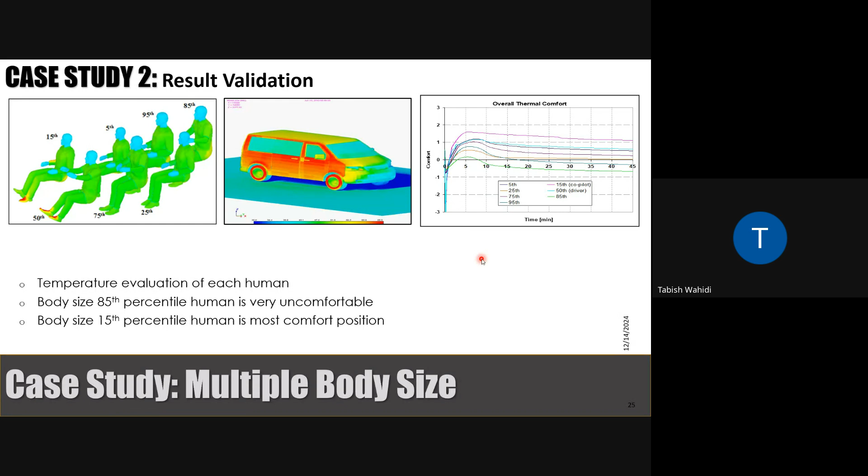One interesting case we carried out was for a military tank. We kept the vehicle outside to understand the solar loading condition - a pretty hot soak condition where the vehicle is switched off and simply kept outside. We try to understand what heat is absorbed within 24 hours because of this high temperature, and what will be the hot spots - the areas getting very hot.

We also look at what happens when you keep your vehicle out even at night, understanding the thermal radiation. Based on that, if an enemy is trying to watch your vehicle from some distance, based on thermal calculation and thermal signature, we determine the probability of detection of your vehicle at a certain location.

If your vehicle is getting very hot at a particular position, we determine whether we need a mitigation technique to avoid or reduce thermal radiation in that area. We can use a shielding method to reduce your thermal signature, or use a technique called camouflage, where you paint your surface in such a way to mitigate detection.

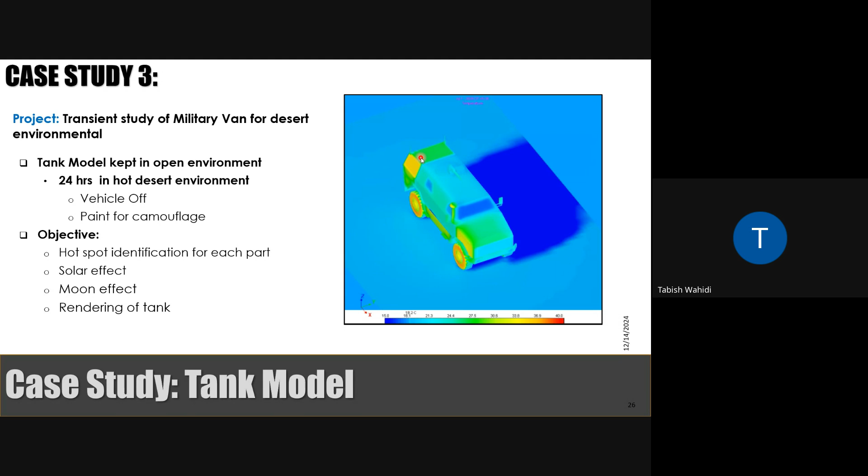Okay, so this was a study to identify the military tank and try to understand human conditions. If you kept a human inside for 24 hours, what will his body condition be? We did the calculation for that also.

Now, one interesting case was where we tried to understand the situation: you kept your vehicle outside, and the human who drove the car to office sat for 2 hours working, although the car was kept outside. After 2 hours, you came back and started driving. All of a sudden you entered your car, switched on the AC, and tried to drive at 50 mph in a particular direction with maximum AC on. So how much time will it take to make the human comfortable? That was the analysis we needed to perform, to find how much time it takes for a human to reach a comfortable, less-sensation situation.

So this was the situation where you have a human and different loading to consider when driving a car in a particular direction. What is the solar impact? What type of heat is coming out from your dashboard? What heat is getting absorbed from the upper panel? And how much heat is getting radiated from your seat to the human, and what is the human wearing?

Based on that, we calculated and gave suggestions on how the HVAC system energy management has to be, how much the AC should be on, what the exact location of the AC should be so the human feels comfortable, what the size of the HVAC system should be, and what the flow rate of the cool air coming out from the HVAC system should be.

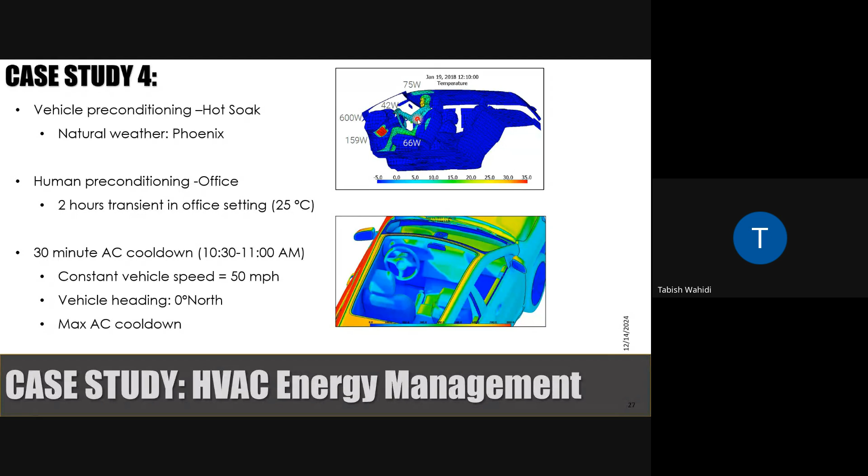That was a case study. Now, one more case study where we had to do analysis to understand a human sitting in an electric vehicle.

Because of fast charging conditions, or a condition where the vehicle may go into thermal runaway, these will impact high energy or very high heat transfer to the vehicle. Your vehicle will already generate a lot of heat during driving conditions, and your battery temperature increases. Based on that, the human sitting inside feels a hot condition because of heat transferred from the battery to the floor, and from the floor to the human.

So how long will your battery stay active when the HVAC system is switched on, trying to give a comfortable, less-sensation situation to the human? If your battery starts draining, the HVAC system is using energy from the battery.

So what will happen to your range also, when your car is already in an environmental condition where solar loading is coming in while driving? How will this impact the range of the battery - that we have calculated. It was like a trade-off situation where we needed to understand human thermal simulation as well as balance the energy management of the battery, so the battery range is good enough to predict that from this much charging you can make the vehicle go up to this many kilometers, even with the AC switched on.

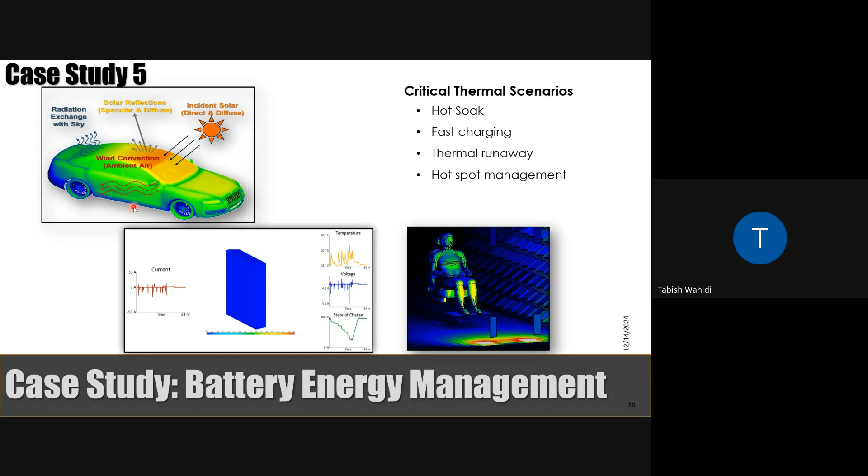So the human sitting inside will feel comfortable. That was the situation when we tried to do the calculation for this - it was like a battery energy management study along with the human comfort aspect.

So this study I'm going to discuss was a glass modeling study. You have two glasses: one is a standard glass, and one is a solar reflective glass, with a solar roof also. The thickness is kept the same for both glasses, the specific heat for the glasses is kept the same, and conductivity, density, everything is the same. Only the difference is in their reflectance and transmission properties.

The reflectance of this one is a little higher, reflectance of the standard glass is less. Transmission of this one is high, this one is less. So if you have a standard glass and a solar reflective glass kept in your vehicle, and we're trying to understand humans - suppose 3-4 humans are sitting inside - what will be the heat absorbed when you have a solar soak condition or you are driving at a particular speed.

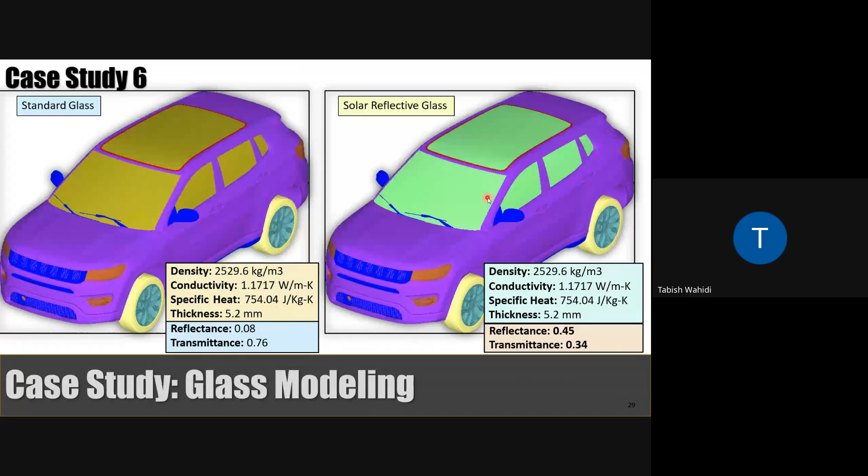So suppose you keep your vehicle and try to understand how much heat is getting absorbed due to solar loading in a particular situation. For both conditions, we run a simulation, first in steady state, to evaluate the overall body temperature, the temperature coming from the bonnet, and the underhood thermal management, since this vehicle is like a traditional IC engine. How much energy is coming out from the exhaust system, and what effect does it have on the floor?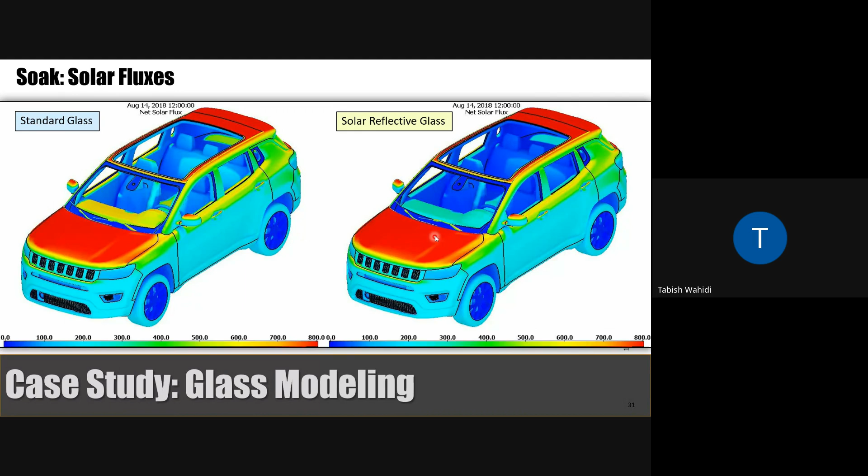So we try to understand the inside temperature when the vehicle is kept under solar loading conditions. Where is the temperature high, where is it low, and whether the solar reflective glass temperature is high or not. You can find some difference in inside temperature. Dashboard temperature under solar condition is very high for standard glass, while for solar reflective glass it is a little less. Based on this analysis, we found that with standard glass the inside temperature is very high compared to solar reflective glass, so it is suggestible to replace it with a solar reflective glass, which gives better temperature distribution.

And then for the human sitting inside, we need to calculate which condition is better. So if you have— yes, Tabish, your PPT is not visible.

My PPT is not visible. Just share it again one second. Is it visible now? Now it is visible, thank you. How long was it not visible? No, just now, just now. One minute, have you seen this slide? With this slide only it was not visible. Okay, it's okay, from here. Okay, sorry, it's my mistake, I don't know how it happened.

Based on the solar load condition, we try to evaluate what happens when comparing standard glass and solar reflective glass effects. We did a complete steady state analysis to understand the temperature distribution across the full vehicle model: the temperature of the upper panel, the dashboard temperature, and the temperature inside the car. You can find a slight body temperature difference. Outside temperature is quite common since both are exposed to the same solar condition, so it stays similar in both cases.

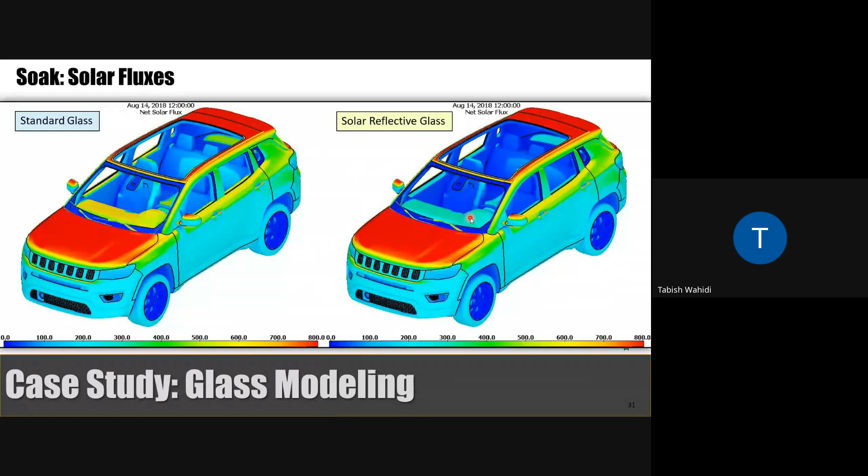You will find differences in other areas though—especially the dashboard temperature, because with standard glass the temperature is a little higher, while with solar reflective glass it is less. We carried out this analysis using solar reflective glass with different reflective indices and different transmittive values, and based on that found the overall inside temperature. With standard glass, even the floor temperature is higher, but with solar reflective glass the floor and steering temperature are less. In the reflective case, seat temperature, surrounding dashboard temperature, panel temperature, and electronic equipment temperature are also lower when solar reflective glass is used.

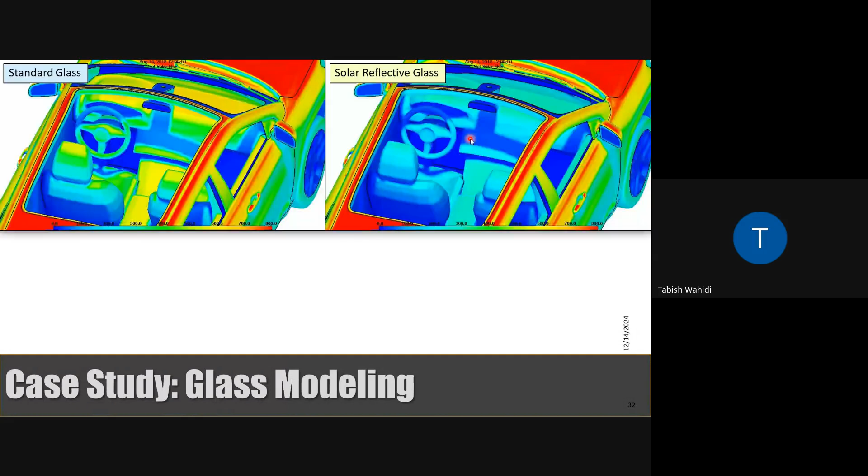So it is suggestible to go for this reflective glass property. Then we try to evaluate, given this situation, whether the human sitting inside will be in a comfortable position. This car's temperature is high, so now we have to understand whether the person sitting inside will be comfortable or not, and based on that we calculate the human inside.

When you try to understand these temperatures, although they are very high, the human sitting inside has a different body temperature too, but on the backside you won't find much difference. The backside is almost the same temperature, but there may be an effect, maybe a little bit less.

So when we calculated power and energy consumption in solar glass versus standard glass conditions, the difference was huge. Energy consumption with standard glass was very high, while with solar reflective glass it was much less. So it was advisable for them to use this glass property in cars.

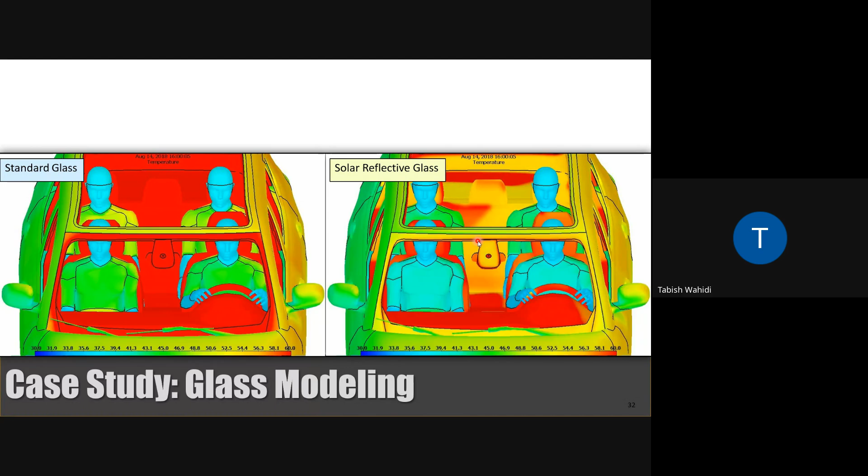Now we have a very interesting case when we started working with the DRDO guys. They gave us a situation: a soldier standing in an environment with solar loadings, different sky conditions, standing in very cold weather, with different terrain conditions and ambient temperatures, all while holding a gun. We account for all these differences and calculate using a standard human.

Based on all these conditions, we try to find the human thermal solution and what his thermal signature will be. After considering human comfort level, sensation level, environmental and weather conditions, the position he's standing in for 5 hours, and a low temperature condition, we found a temperature distribution of the human.

This is a human soldier signature. Because of IR cameras, an enemy sitting at a certain distance will try to find the human, or try to find a defense asset from a long distance, identifying whether a human is standing there, what he's holding, whether it's a gun or something else, what type of tank model is situated at that base camp, how many humans are there, and they evaluate what's called probability of detection.

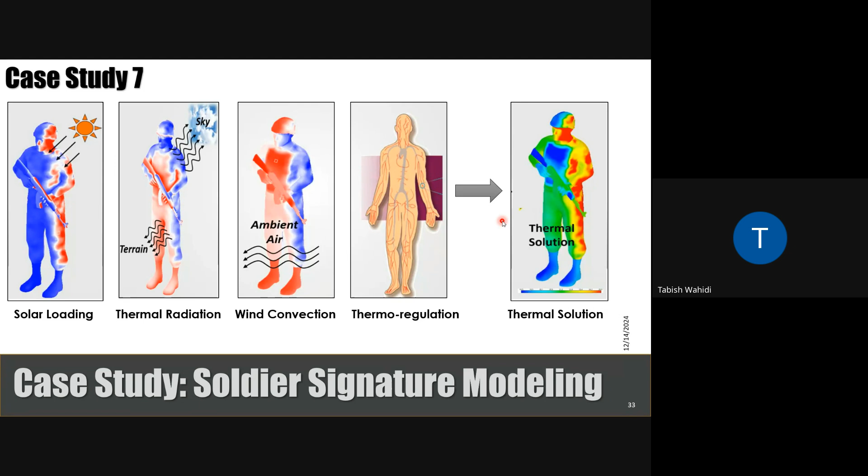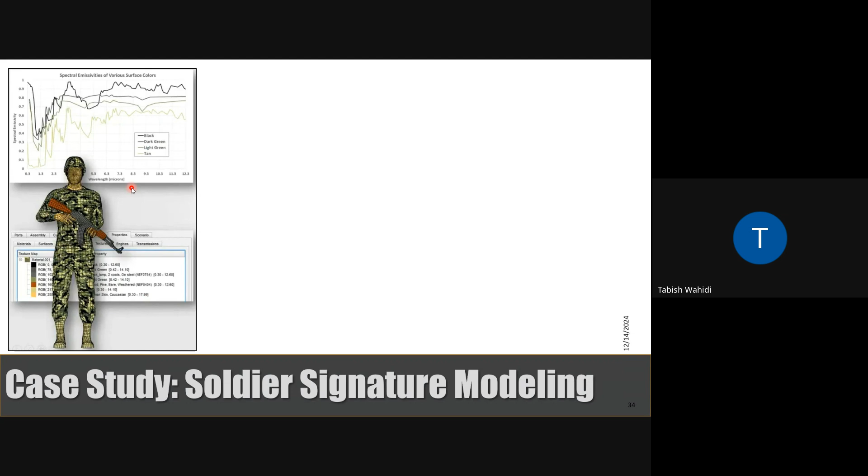So our intention is to do the thermal calculation first, to find out how much thermal signature is coming from the soldiers. The next stage is to identify the human and give them a particular clothing system with different surface emissivity, creating a human soldier condition with different clothing patterns.

Then we evaluate the human signature at different wavebands. We change the clothing system and evaluate human visibility with IR at different wave bands, like short wave band, near wave and mid wave band, and how much the human or soldier is visible at long wave IR band.

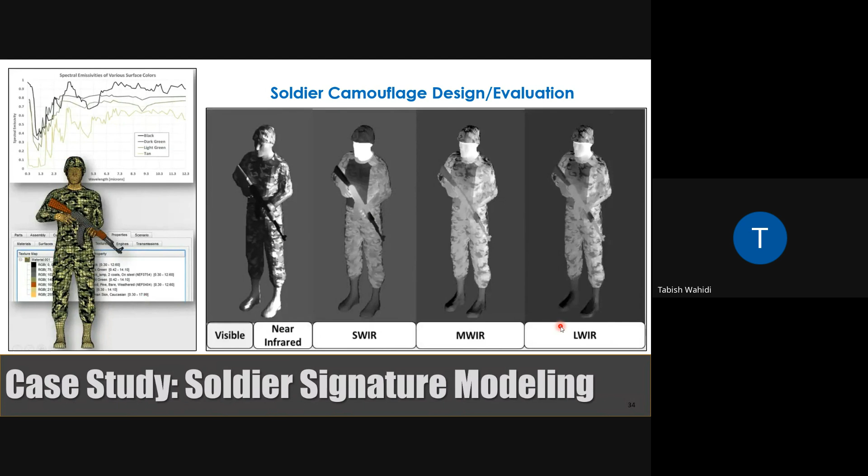At different wave bands we do the calculation to give them results, showing whether wearing this clothing system while holding a gun, a human can camouflage with the background. We check if the human figure, like the shoulder, is visible—almost completely camouflaged in short wave band, but only slightly visible in long wave IR band.

So this thermal simulation tells us whether a human wearing a particular suit in a particular weather condition feels comfortable. If comfortable, that's good. Then, wearing this clothing system, we determine how much thermal signature comes from the human, how much of the human is visible at different wave bands, which wave band shows the most visibility, and whether in that wave band the human can be camouflaged with the background.

So all this is being carried out. One very interesting case we did was for an ordnance factory, involving comfort level calculation for a soldier wearing high-sense thermal comfort clothing, especially designed for the Siachen areas.

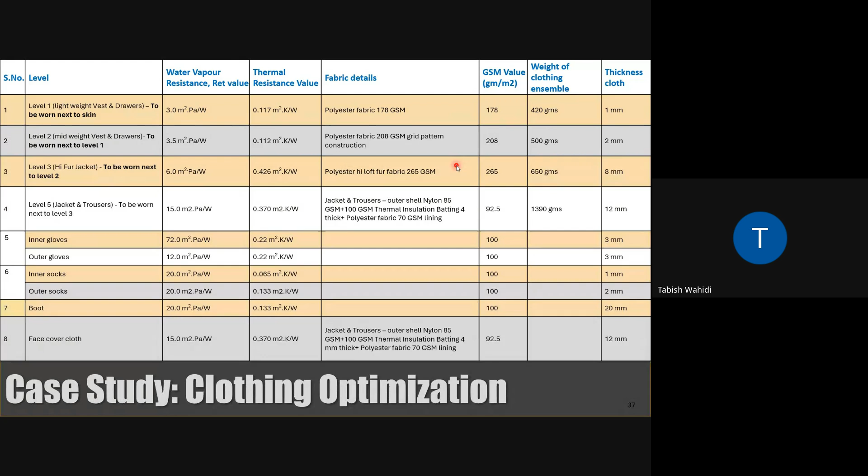And one more interesting thing happened when they tried to create a scenario. It's like a surgical type of scenario when a human is jumping from a height, wearing some special suit. Then he has to run for almost a 100-meter fast run. Okay, and then he will hide somewhere for a minute or two. Then he will walk down and try to find the enemy base camp and do all these activities.

So based on all these situations, which type of clothing will be the best for them, what type of thermal insulation we have to provide. So considering all these activities, the level of activities and duration of activities, you need to perform the simulation and find out the human thermal result, so that it won't be identified from this different wave band, and the human will feel comfortable.

So based on this, you need to perform a number of iterations to finalize what will be the clothing system. Apart from the previous case, they have one more added case for us. Now, to optimize, you may have to perform 2-3 rounds of simulation.

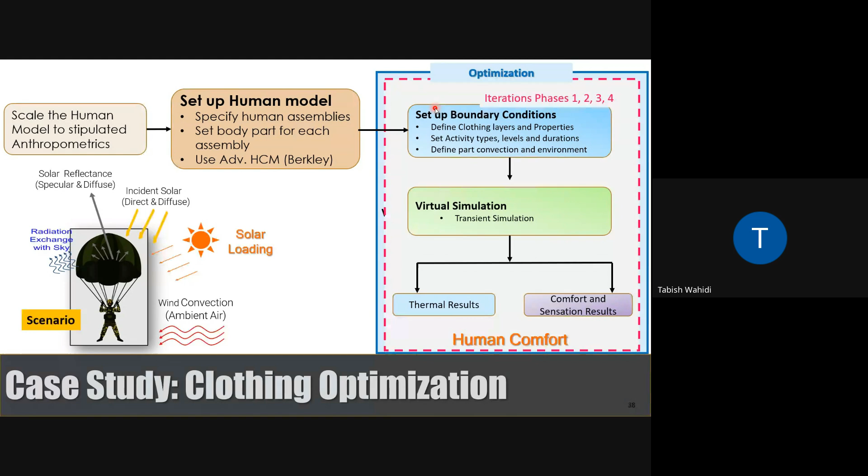So to perform this type of thing, you must have a CAD model. You take a dimension of the CAD model, what they suggest as a 6 feet human being. Then from the CAD model, you convert it to a mesh model. From the mesh model, they try to give them clothing around this, like a human wearing boots, and then his 5 level clothing system with gloves. He's wearing a glove. So considering all this clothing over the human, you try to perform the simulation.

And this simulation gives you overall comfort and sensation information. So based on that, we can say that a human wearing all this clothing system is not feeling very comfortable. Overall sensation is very low, the feeling is very cold condition. So these are the results I'm sharing today.

That means we need to come up with a new plan, a new clothing system, so that after having continuous activity there, the human will still feel chilled because the environmental weather is very harsh. The temperature is around -35 or -40, ambient wind temperature was also very low, and wind speed is very high at that time. So based on that, even if the human is not feeling very comfortable, we need to suggest them a very different type of clothing system.

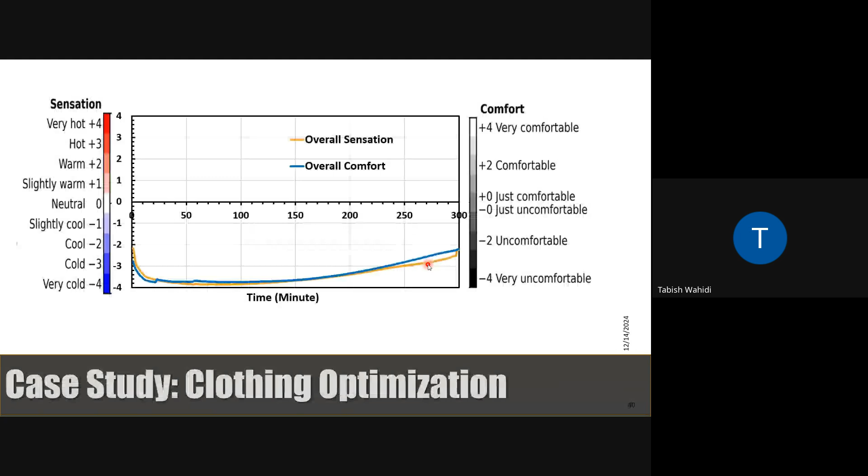Okay, then one more thing to give you understanding of how - so based on that, I'll try to summarize how you're going to perform all these thermal simulations. So why is thermal simulation needed? It will give you predictive information and try to quantify.

You can also pull apart from your clothing or physiological information. You also keep the environmental condition into loading, so that your thermal simulation will be much more realistic in that sense.

And generally for thermal simulation, people use it for HVAC optimization, for seat designing, or for cabin comfort analysis. People do this thermal comfort analysis for range calculation for EV vehicles. Suppose your EV vehicle HVAC system is using the energy of your battery, so you need to understand when to switch on the HVAC system to make the human comfortable.

If you're trying to understand how much a human is getting comfortable at what temperature, so that you can optimize your range, in this human thermal simulation we have to consider your environmental condition, what is your physiological condition, what type of human information is there, what body mass index the human is posing, what is his gender, what type of activity he is doing, and what is the level of his activity.

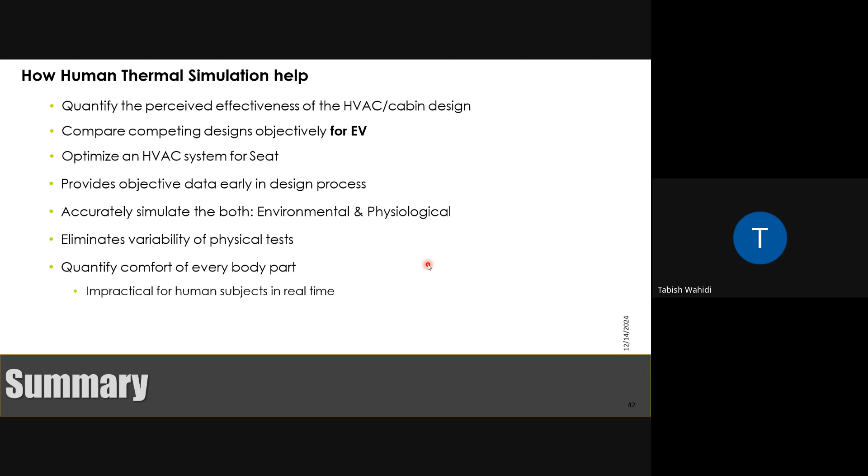So this thermal simulation is very much needed when trying to understand the comfort and sensation of men in any adverse situation. A lot of guys are doing this for cabin condition, clothing optimization, clothing design, boot design, or it is very much needed even for a situation when you have a cabin and electronics heating surrounding you. So we need to understand where you should keep your HVAC system, what will be your mass flow rate, or how much temperature is sufficient to make a human comfortable. That is the situation where you need to do thermal simulation to make human comfortable.

So I hope I am clear to everyone on this. If you have any question, I'll be happy to answer.

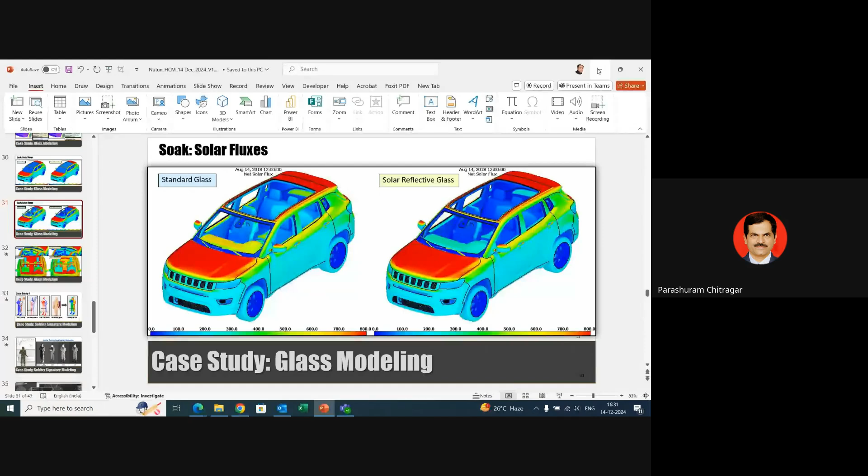It's not the case where we are dealing with the greenhouse effect. The main intention was to understand the effect of material on the automobile and the human sitting inside. That was not the point of consideration. The agenda of that simulation was not to take into consideration the greenhouse gas effect. Only when you change the material, you come up with a new material like different reflective systems and different transmitting glasses, so what will be the inside temperature of the cabin, and with the AC on in a particular situation, what will be the human comfort level, the sensation level, and the overall cabin temperature. That was the primary agenda for that simulation.

Okay sir, and what about the toxicity of these materials? What are the toxicity levels? It was a glass, simply a glass, not something special, only a glass with different refractive index values and reflectance values.

Then in that case, I think as the greenhouse effect is related to wavelength versus solar radiation, which we are all aware of, heat will be trapped inside the car. So is there any possible solution to take care of that greenhouse effect inside?